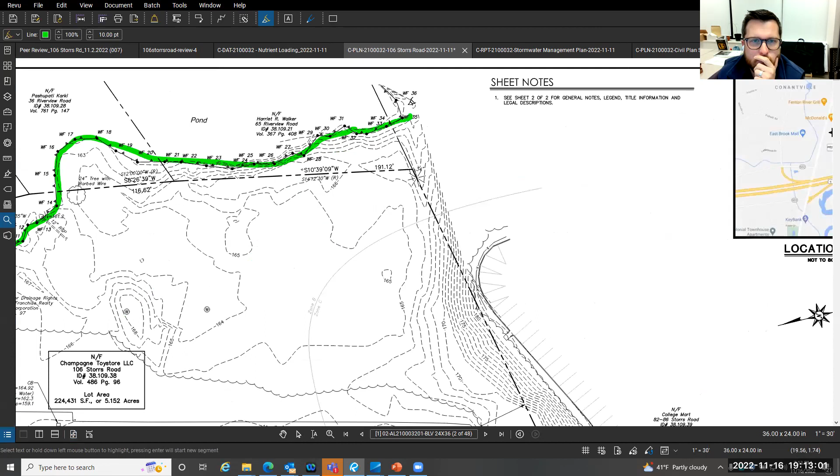So as you can see, obviously the majority in this area are all residential, and as they kind of come back towards McDonald's, they sneak into the corner of this property here. Move forward to our proposed plans. Sorry. All right, so proposed conditions here.

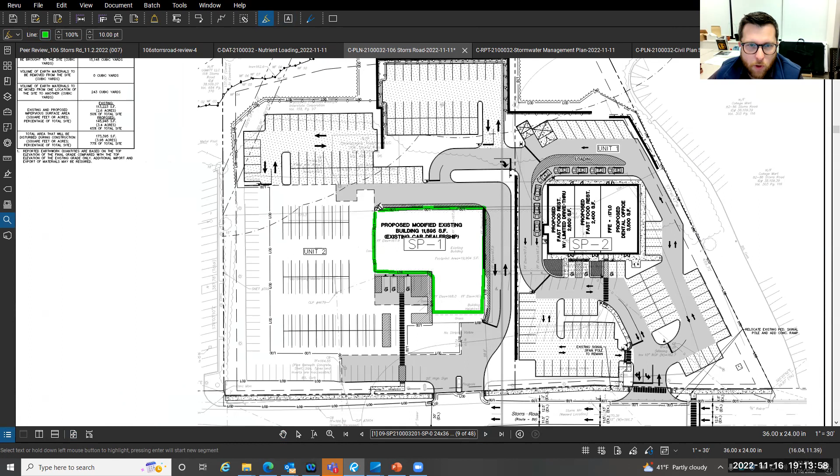So the goal is for Champagne Motors to remain on the property, but it'll be significantly reduced. So I'll just highlight it for you quickly here. The goal of Champagne Motors is to reduce the overall size of their building, but still maintain the services that they do provide now, obviously selling cars, and then obviously doing the necessary repairs. So as I said, it was about an 8,000 square foot reduction, leaving about 12,000 square feet on the property.

In addition to that, their driveway will remain the same along here. Storrs Road is still along the bottom of the page for orientation, with some parking reconfigured along the front and side, with expansion of parking towards the rear. On the right-hand side of the property, where the Champagne Motors is being demolished, I'll just show you roughly where that is in red here. This is the portion that's being demolished. We're looking to add a new mixed-use development that would have a mix of 3 different tenants, 2 restaurants, and 1 dental office, approximately 8,500 square feet.

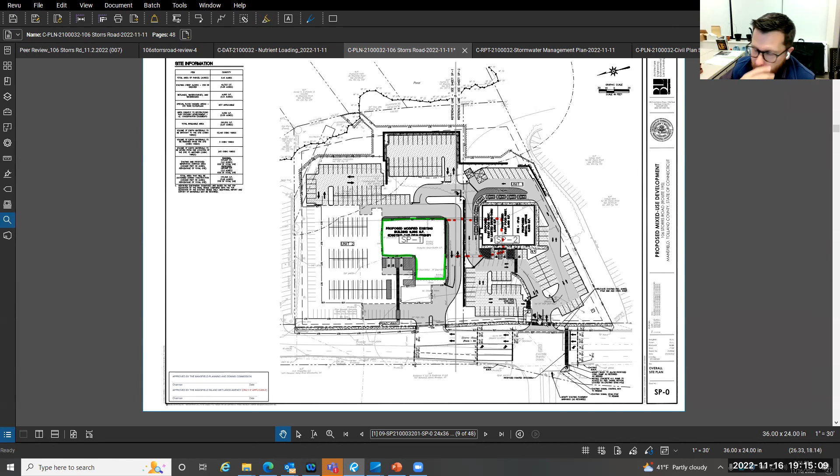This development would have a new driveway that lines up with the intersection to the Eastbrook Mall, currently a signalized intersection that has 3 legs, obviously left and right on this page for Storrs Road, and then 1 traffic signal facing the Eastbrook Mall. We would be looking to upgrade that signal to provide another head that faces our proposed development. So you can see roughly where my hand is here would be a secondary entrance to the property for this development, but there is interconnectivity between the properties as well. This will all remain under same ownership, just 2 different condo units.

Just to point out too, obviously Storrs Road is a DOT road. So a lot of these improvements in terms of striping, signalization, crosswalks, things of that nature do need to go to DOT for review and approval. Some site features that we're proposing, I'll just point out here. We're proposing sidewalk along the frontage of the property. There's currently none on this side, so this will hopefully be the first domino to fall to eventually the redevelopment of other parcels along this for the walkability of the site. We do show connections to both of the developments for connectivity to those sidewalks.

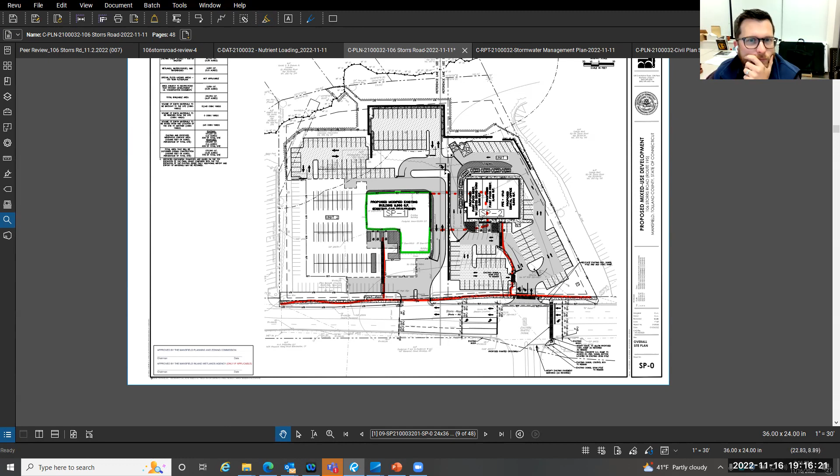In addition to that, we do show patios along the front of the mixed-use development for the guests for eating. We also show a bike rack as well for an alternative mode of transportation for visitors to the site. Well, one of the restaurants has a pickup window. It's not a drive-through; it's the pre-order pickup window. So we do show loading and queuing along the back of the building with the pickup window where my hand is hovering here. We also do show a loading area as well, and we do show some dumpster enclosure areas towards the rear of the building.

Jump forward to our grading and drainage.

Sorry, a little bit of a cold. My toddlers pay me back from going to daycare every day.

So the existing site has a very limited stormwater management system. It's really basically catch basins and piping that directly discharge to the wetlands, roughly in this vicinity here. So obviously we're looking to make some significant improvements as part of the redevelopment, using the town regulations as guidelines along with the Connecticut Stormwater Quality Manual and the 2002 Erosion and Sedimentation Control Manual. So I'll talk about these in two different phases. I'll talk about Champagne Motors, then I'll talk about the mixed-use side.

So Champagne Motors is obviously a retrofit. We're touching less of this property, but we still try to make improvements to how stormwater management is done on the property. So there's a lot of existing catch basins and piping that will remain, but we're adding additional catch basins with deep sumps and hoods. We're adding offline hydrodynamic separators, and we're adding a subsurface detention system and an infiltration system. So just roughly in general, all the water on this side of the property flows directly back to the wetland here.

So I'll just move forward to the erosion sediment. Utilities first. In general, as I'm sure you're aware, developed area, all utilities are available, either on site or on the street. So water, sanitary, gas, tel data are all available. So we'll be modifying obviously any connection to the existing Champagne Motors when that portion is demolished to sustain that building and be bringing in new utilities for the mixed use development.

Erosion and sedimentation control. Obviously, there's going to be some earthwork here, and the goal is to be able to protect the town road, the abutters, and more importantly, the wetland to the rear. So we have provided a variety of control measures on site that the contractor should be putting in place prior to starting of work, maintaining throughout the work of the project, and should be maintained until the site is fully stabilized and to the satisfaction of the town.

So a bunch of these things I'll just point out to you. We have a construction entrance, silt sacks, silt fences, soil stockpile areas, erosion control blankets, all these devices that will help and aid, and protect, as I said, roads, abutters, wetlands, while the site is being constructed, and should remain in place until everything is stabilized and operating properly. So there's no detrimental effect to the wetlands.

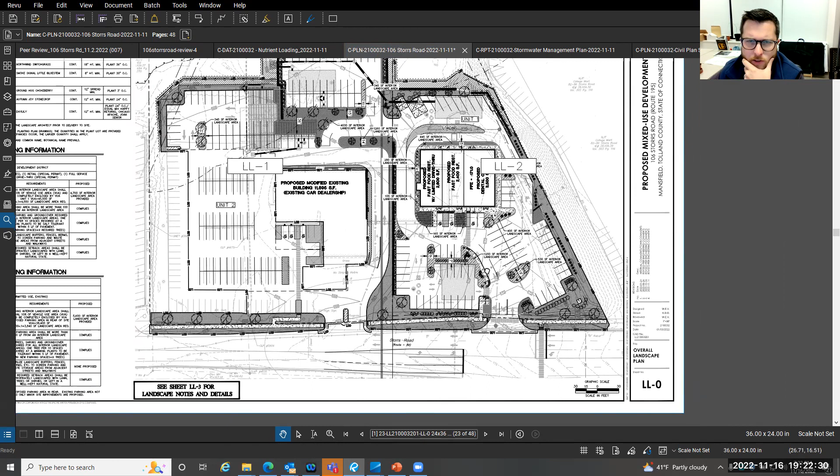Obviously, I pointed out the proposed sidewalk along the front of the site. We're pairing that with a variety of street trees and shrubs. On the right-hand side, we get into a lot of interior landscaped islands with trees, shrubs, and grasses. That continues around the perimeter of the parking as well, and along the redeveloped parking spaces behind Champagne Motors. I'll point out, in addition to that,

a wall as part of the development towards the rear here as well, to minimize the incursion into the upland review area. We're obviously trying to maintain the existing vegetation to the rear of the lot, and we are also adding a fence along the rear to complement the naturally existing buffer back there, from a safety standpoint and a buffering standpoint.

So, Mr. Chairman, that's a high-level overview of the plans. I'm happy to have Eric Davison speak to his investigation on the wetland delineation, and then we're happy to answer any questions you guys may have. So, Eric, are you there?

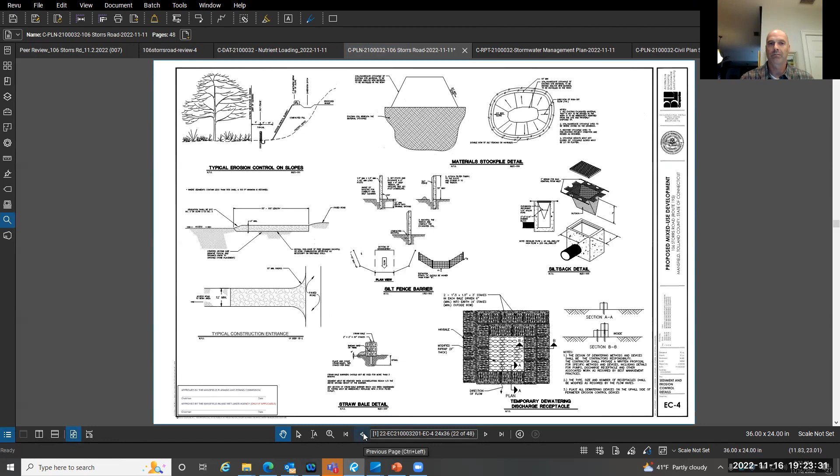Yeah, can everybody hear me okay? Yep. Hi, my name is Eric Davison. I'm a wetland scientist, soil scientist, and wildlife biologist, Davison Environmental.

Just a quick summary of what we've done on the site. We delineated the wetlands in March of 2021. We did some wetland evaluation in the fall, I think in November of 2021, to do a basic wetlands functions and values assessment.

And in that assessment, we identified the potential for some vernal pools in the bordering wetland east of the site. And so we sort of tabled that initial assessment and did a vernal pool assessment this past spring, and then did a subsequent report that tied delineation, the wetland functions and values assessment, and the vernal pool survey all together. So I'm assuming you have a copy of that report. It was dated August 29th of 2022.

As Matt said, there's just one wetland system on the east side of the site. Most of the wetland actually occurs off-site to the east and behind the subdivision that is on Riverview Road. It's one continuous wetland system. It does extend a little bit to the north and extends a significant distance to the south. To the north, just off-site, the wetland essentially ends. There's no feeder stream or wetland system. It's really just fed by runoff from surrounding development.

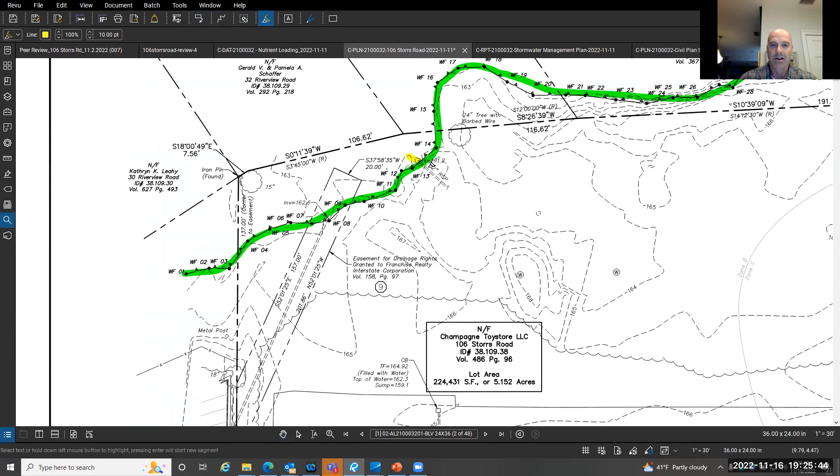The only area that's directly draining from the site with a surface discharge to the wetland is a pipe that outlets right around wetland flag 13. Maybe Matt can elaborate on the source, but I'm not certain we ever determined the exact source of that pipe. But based on what's at the outlet, which is a significant amount of sediment and trash, it's likely that source is road runoff.

The wetland bordering the southeast portion of the site, there's a large offsite pond. It's a human-made pond, based on the fact that it's a fairly perfect circle, and it has an earthen berm on the southern end. So it was clearly created, probably historically, for some type of farm use, for livestock or for crops or something. But it's basically a small circular pond. As I said, it has an earthen berm on the southern end.

That earthen berm has been breached, and so the pond is basically in a flow-through condition. It has about a foot or two of standing water, depending on the season and whether there was a recent storm event. And at the northern end of the pond, there's a pretty significant sediment delta that appears to be sourced from that road runoff. It appears to be road sand type material that's formed a sediment delta in the northern end of the pond. And you can see that in the photographs that I included in my report.

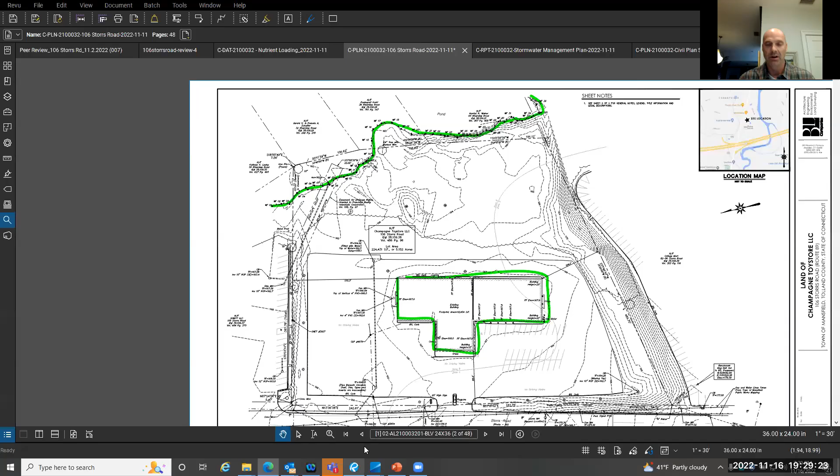The only thing breeding in the pond were green frog, which is a common amphibian that occurs statewide and most typically in disturbed habitats that are permanently flooded. It has a multi-year larval life cycle, so it requires permanent flooding. In the initial parts of the survey, we went out and did chorusing surveys. In other words, we listened for chorusing frogs when we knew that the wood frogs would be actively conducting breeding choruses just based on what we were seeing at other pools we were surveying statewide.

So we went and surveyed the pond, heard no chorusing, but I did hear chorusing off in the distance in that southeast system where I had mentioned there looked like old relic oxbow features. So I traced that chorusing down, found one adult in an area that was not suitable breeding habitat, but it led me to believe that if there's one, there's more.

So on the subsequent visit, we searched and found a vernal pool in that wetland system that's basically south of Riverview Drive, or Riverview Road, and north of Route 6. And that vernal pool, I GPS located with a Trimble GPS unit and put that data onto a GIS-based map, which is included in my report, so you can see where that pool is in relation to the property boundary and the site. It's approximately 600 feet away from the site boundary or the edge of the site activity. So it's a pretty significant distance.

That vernal pool just had one indicator species, wood frog. I didn't find any salamanders of any kind in the vernal pool or in the on-site pond. So the only indicator species in this whole system that I could find were wood frog, which is what you tend to find in these more stressed systems where the landscape is a bit more developed. The Ambystoma salamanders tend to disappear before the wood frogs do.

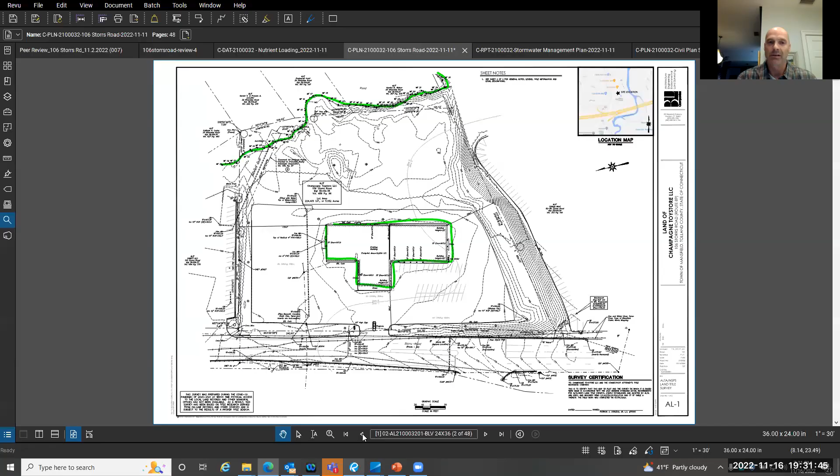In terms of the upland review area, or the wetland buffer, that lies between the existing building and parking and the wetland, most of that is disturbed. Historically, it is all forested now, mostly with young trees. But when you walk that back wooded area along the edge of the wetland, you can see old fill piles, old cut slopes, old berms.

So basically at some point that whole wetland boundary was manipulated and disturbed, but it is all revegetated now and mostly forested, mostly with mixed hardwoods, a few pines, mostly just typical mixed hardwood species, and a lot of invasive shrubs like burning bush and things. So that's a pretty decent overview of the wetland conditions.

Again, my report talks about functions and values and some of the other things. I'm assuming maybe you have some questions. I don't know if there's anything else you want me to go into in detail. Thanks, Mr. Chairman, Eric. I think just in general, that's our overview. So happy to answer questions. I'm sure you have many.

Thank you, Matt. Thank you, Eric. Commissioners, anybody have questions for these presenters? Yeah, John. I have a few questions here. I'm trying to understand on the south end of the property, how much fill is going to be put in there? How much is this going to be raised above its current area?

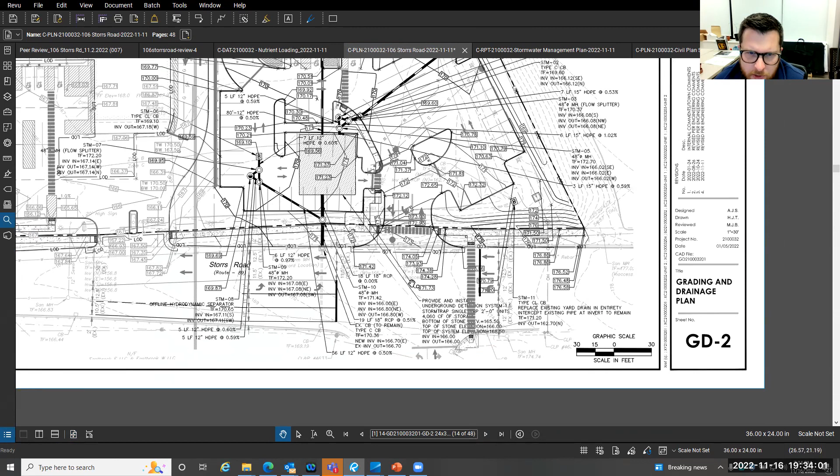So roughly in the middle is around 173, and we'll be coming down into the property for a finished floor elevation of 171. If you can see below here, I'll highlight the two numbers for you: 171. The existing finished floor elevation of this end of the car dealership is 167.9. We'll call it 168. So there's around 3 feet of elevation change between the existing finished floor building here and the proposed mixed-use building.

And to the south, that's a slope up to the next development. Is that right? Correct. You're talking about over here where my hand's floating? Yes. Yep. That is a slope up to the Staples Plaza. I'll just show you because this is that slope here. The property line obviously falls towards the bottom of that slope from this view.

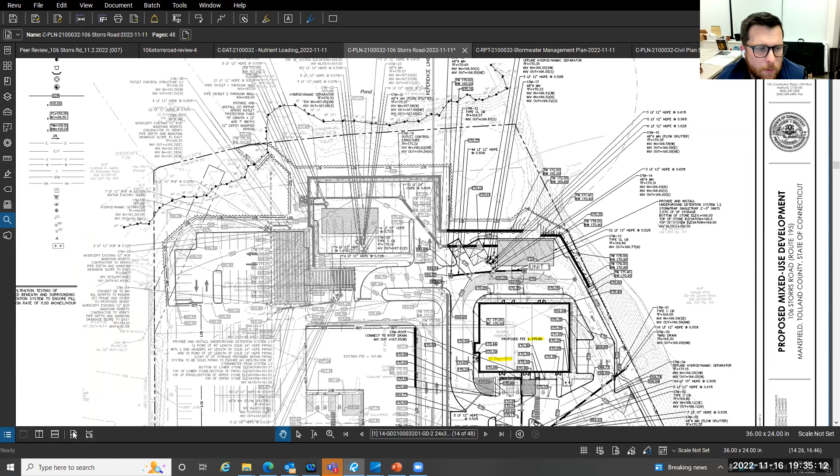And there is some steep contouring in the rear, the east end. Is that right? So that's going to increase the contours at the back end. No. So let me just show you. I'm going to just bring you back to the existing conditions survey just to show you.

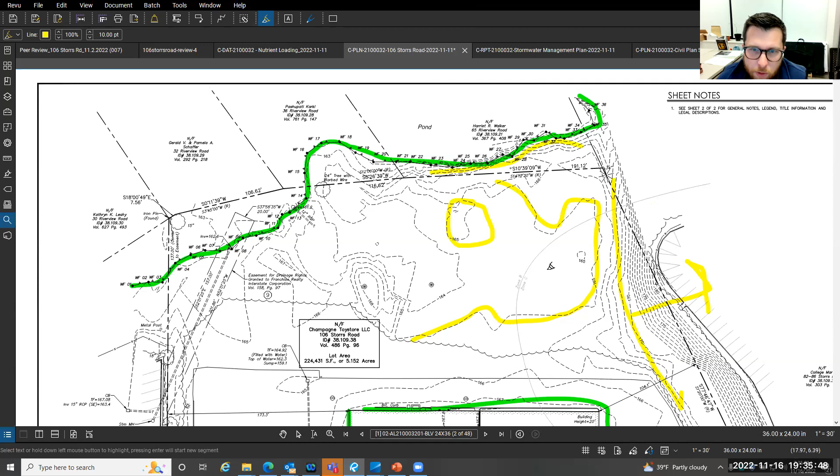So you can see, obviously, there's quite some tight topography moving this way to the south, but this is relatively flat back here, right? So 164, maybe a high spot of 165. There is, as Eric mentioned, a little berm off the property adjacent to the wetland in this area, but in general, 1 to 2, 3 feet of elevation change existing currently.

If I go back to the proposed site or grading plan, one second, don't want to give anybody a seizure here. We are proposing a retaining wall as part of the back of the development. I'll just quickly highlight it here. So the goal of this is, as part of the peer reviewer's recommendation, to limit disturbance into the upland review area. So we're looking to maintain the vegetation and the topography in the rear here, and we're using a retaining wall to make sure we don't encroach too far with slopes. In general, that retaining wall height varies, from a few feet maybe up to 7 or 8 feet in some of the higher spots in the corner here.

Matt, just to clarify, does that mean there's 7 to 8 feet of fill in that area where the retaining wall is that high? So let me get you more specific here. All right, so highlight the wall again on the Champagne side. So in this area here, you can see bottom of wall 164 to 173. So we're roughly about 8 feet in that area there, tapering back down to nothing. In this corner over here, we're looking about 5 feet.

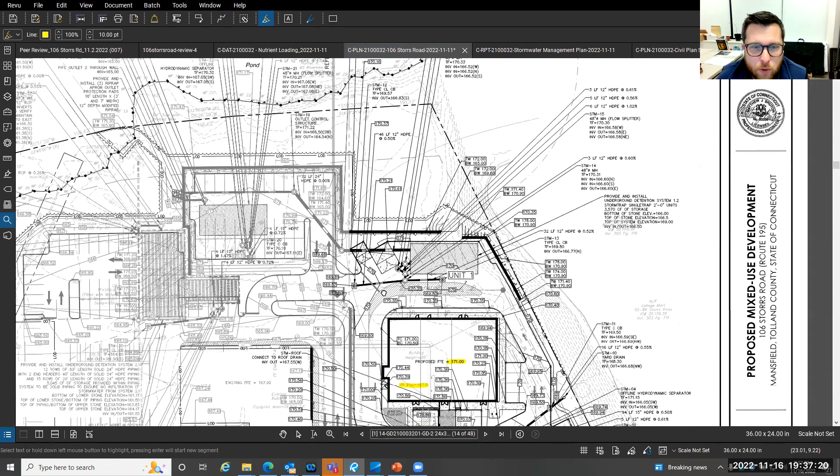If I jump over to this side, area here, like I said, 5 feet on this side. As you come towards the end here, looking around 7 feet, and then as we abut up to the Staples Plaza with that slope, we're on the lower side here. Obviously, the high side is Staples. We're around 8 feet here, but tapering down to 1. So around 8 feet is the highest it ever gets.

Okay. Another question sort of following up on this. There's a substantial increase in the paved surface here. I presume this is impervious surface. You're not looking at semi-pervious surface, but is there any way to reduce that sort of bump out parking lot in there? And I'm looking at this very contorted road system that's in there. There must be a more efficient way of doing this without encroaching on the back end and the wetlands. Based on what the wetland scientist said, this seems to be remnants of a natural riverine system with some oxbows. It would be nice to be able to preserve this to the extent possible.

And certainly this is a vast increase in the amount of parking relative to what is currently a car dealership with lots of parking on it already. So I don't know whether there's a way of reducing that or reconfiguring the contorted road network on the property as far as the proposed plan is concerned.

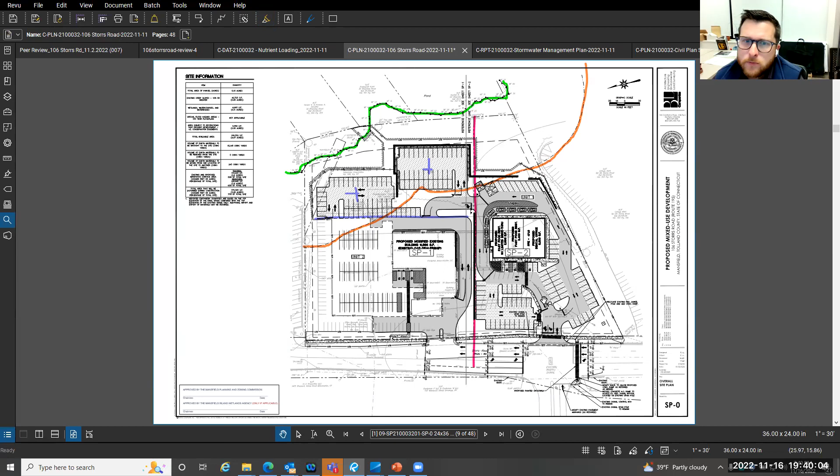Oh, sorry, go ahead. What about getting rid of that road behind, and there's an open space just below the red line there? You're talking about this road here? Yes. And then moving the parking lot further. Yep, understand. So the goal of maintaining this roadway here where my hand is floating is to provide interconnectivity between the two properties. The goal is driven from a safety and functionality standpoint between the two businesses, but also from a traffic standpoint as well. Not having people leave a property, go down the street 100 yards, and then come back into the property. So from a functionality standpoint, we believe that a driveway connection between the two sides of the lot is critical to the operations and safety of the site.

So I'll continue this purple line here to your questioning. That is roughly the existing extent of the existing pavement behind the building. So this purple line, anything behind this is an additional impervious area. Obviously a portion of that, as you can see from the orange line, is in the

upland review area. We did come in, as Eric mentioned, with a different plan prior to the vernal pool study. We had submitted that to the town. I don't think we got as far as this commission, but I do have it here. It was a lot bigger development. We had 4 tenants, 2 drive-throughs, more parking, more dumpster locations, and honestly, we were staying out of the wetland,

but we were basically clearing almost the entire lot. Based on feedback from the town, some of the site walks, and consultation with Eric and then peer reviewers, the revised application in front of you has been dialed back significantly to provide the needs of the business, but also hopefully respect the wetland resource to the rear of the property.

I have a few other questions, so maybe I'll let other commission members chime in if they have any. Go ahead, Chad, and then Aaron. Okay, I was going to stay on this figure here. And I have a similar question as what John raised about this expanded parking. And I understand trying to maintain functionality and use of the 2 buildings while providing, sorry, I have a cold, as well, connectivity between them.

But who's envisioned to be parking in those lots? Will it be the folks that are using the mixed use buildings, or will it be Champagne Motors folks? And I'm asking the question because it's a substantial increase in impervious surface proximate to the wetlands, and the parking is almost entirely within the upland review area. And I'm not seeing walkways that connect those parking lots to the mixed use development. So I'm wondering what the intended purpose is.

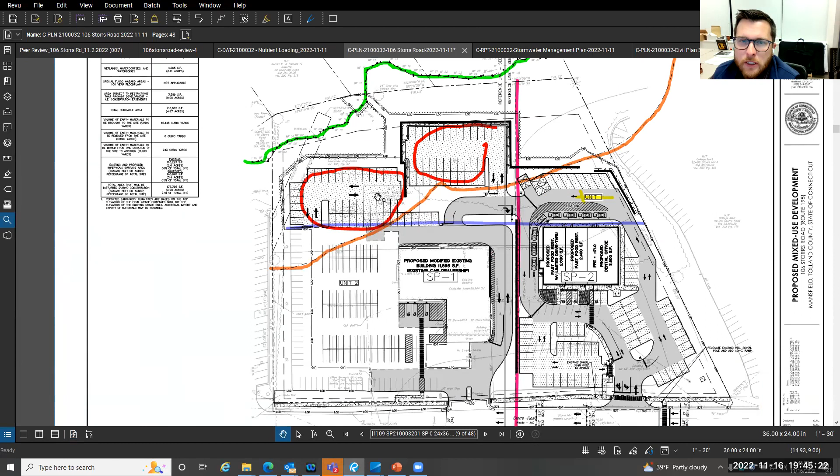So it'd be standard. All the spaces that are shown on these are standard. I think that 9.5 by 19 is your regulations in terms of parking space size. And you can obviously see here as well, zoomed in, that we have double stacked cars as well. So it's not really functional or necessary for the mixed use development. So they will just be cars to be sold. Thank you. I have a question.

Wait, let's just, Chad, do you have more questions? Okay, questions related to this. Yeah, let's go to Aaron, and then we'll get to Meg, and then we'll get back to John.

My question had to do with, so you have a retaining wall that starts at that kind of middle parking lot. So I'm wondering about the parking lot to the north, if you have a vegetative buffer plan there, or if you're going to do plantings between that parking lot and the wetlands.

Sorry, I just want to make sure I heard your question correctly. There was a little bit of echo. Are you talking about the vegetation along this area where my mouse is moving right now? That I might have missed. What's planned for that area? Sorry. Here, let me move to the landscape plan, and then you can steer me in a different direction if you think I misunderstood your question.

Okay, so let's just get some highlights out here. So the retaining wall along the eastern side is in this direction here. On the northern side, change colors, the existing edge of pavement is roughly in red. And if I change over to green, obviously this is the expansion of the parking lot on the northern side.

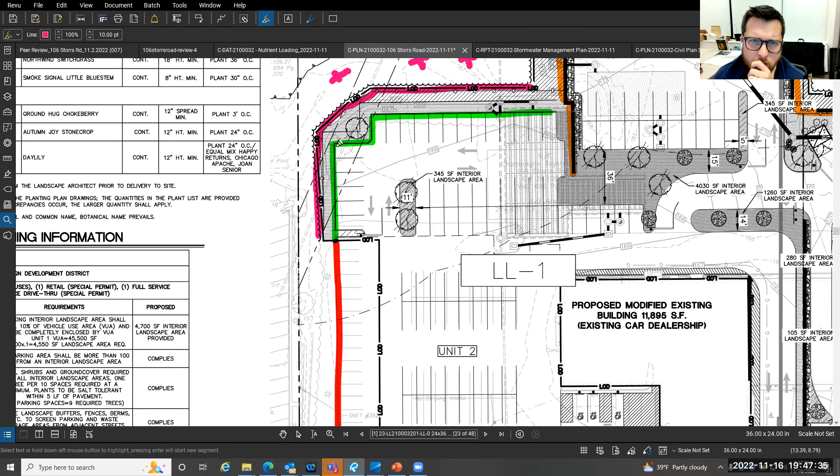We're showing, again, a limit of disturbance marked as LOD here that I've highlighted in pink. So anything beyond this, kind of in this area where I'm putting those plus marks, is existing forested area. So in this area, beyond our curb line between the LOD, we are showing a fence, and we are showing grasses and trees along the perimeter of the parking. That obviously continues as we go south and to the east as well.

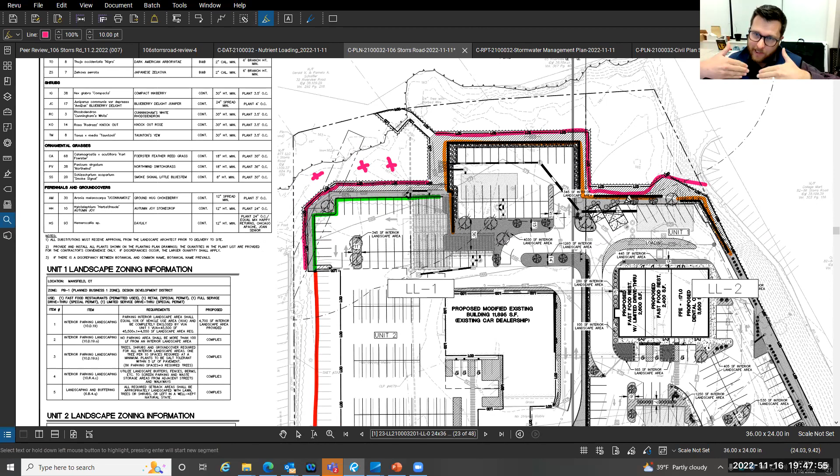The LOD obviously is around here as well. And we do show plantings on the high side of the wall, and then vegetation obviously on the low side of the wall. Does that answer your question? Yeah, how wide is that? From the edge of the parking lot to the pink line? I think she means how wide is it between the retaining wall and your tree line? Yep. One second, I can give you that exact number.

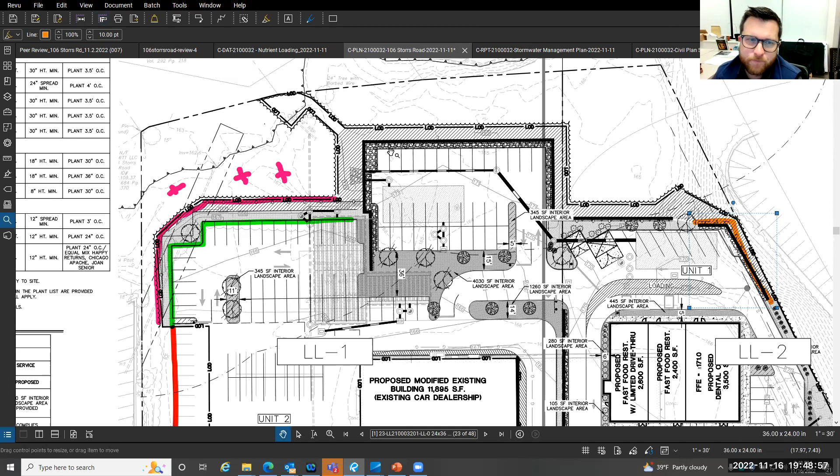Approximately 10 feet. Obviously, we wanted to keep it as tight as possible. There's obviously a little bit of disturbance on the downside of the wall just for the constructability of the wall. Matt, is that a sloped area, that 10 feet, or is it relatively flat? It's relatively flat. If I just go back to the grading plan, I can show you that specifically. That's okay. I just wanted to get a sense of if there was a steep slope or not.

Yeah, so just to give you in general, I showed you before that kind of high spot of 168. We're proposing to continue a high spot. So relatively flat at the base of the wall, which blends in with the topography between the wall and obviously the edge of the wetland. Thanks. Aaron, did you have more questions or comments? No. Meg.

Yeah, I wanted to pick up on the comment. You can go back to the parking, the labyrinthine parking. Is this more, less, or the same amount of parking for the Champagne Motors part than they have now? Because they're demolishing their body shop, right? So they're getting rid of some of their operations. So how does the proposed parking compare to what's present now?

Hold on one second, Meg. I gotta get that number for you. I will say that while I'm figuring out that number, they are reducing the size of the building, but still keeping the amount of services that they do have. So they still are selling cars and doing body work. They're just doing it in a smaller space. But give me a second, I can find out roughly the number of parking spaces before and after. Well, there's more area than spaces, really.

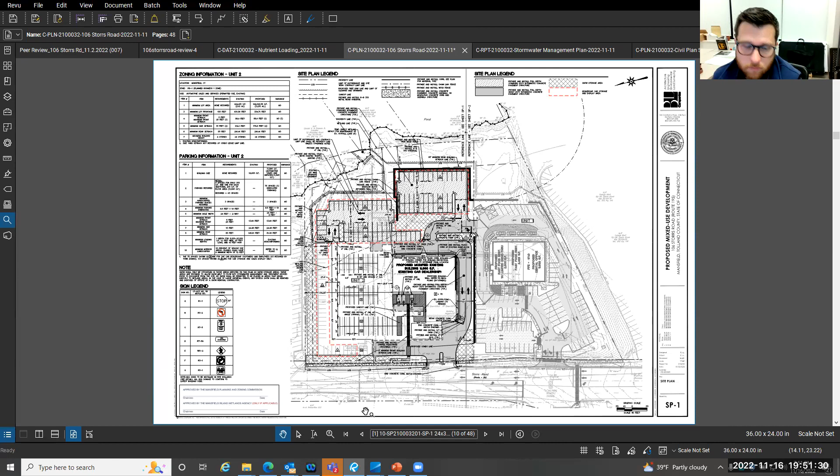Okay, so the connecting drive that sort of pushes the easternmost parking lot out close to the upland review area. I'm not sure that I really understand the need for connectivity. Is there some need or desire on the part of the owners of both proposed developments to connect from one to the other? Is there really a functional need for that? Because it does push that parking lot out quite a bit.

Yep, I understand your question. So, yeah, it is a real functional need, right? So just picture this. Obviously, employees from Champagne Motors, salesmen, mechanics, the owner, and then people coming to visit to get their cars repaired, or they're shopping for a new car. And then next door now they have a new amenity, right? There's restaurants.

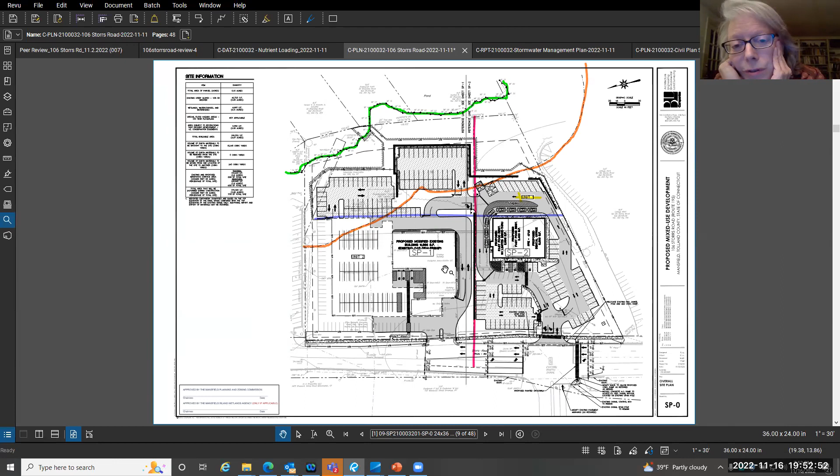So I can easily imagine employees and customers coming to Champagne, crossing over to the other side of the parcel to get lunch, get dinner, kind of be patrons of this whole area, as opposed to just coming to one portion of the site. So there is a kind of a practical need for the interconnectivity between the two businesses on the same property. Well, as Chad pointed out, there isn't even a walkway connecting for just walking over from one building to the other suite of buildings.

Yeah, so there's no interconnecting connection from a pedestrian standpoint on site, but we are showing, as I said at the beginning, on the road side, obviously a frontage sidewalk along the entire thing and connectivity to both front doors as well. Just to remind everybody, we are raising the grade on this side to make the driveway connection to the existing traffic signal. So there is a retaining wall here in yellow between the two sites. So the pedestrian connectivity between the two sides of the lot will happen along the frontage or through the driveway to the rear.

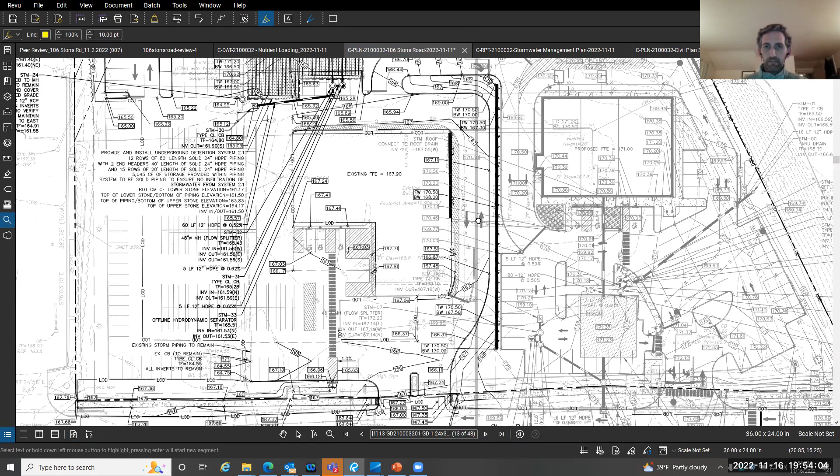What's your elevation change at the west end of that retaining wall, Matt? I'm just curious, because I was thinking earlier, there could be a reasonable alternative where you have a pedestrian and vehicle connection at the west end of that retaining wall, in the front of the buildings, instead of in the back. Yep. So the retaining wall, highlighted here in yellow. We're somewhere around 3 feet here. Yeah, it's about a 3 foot wall between the two driveways.

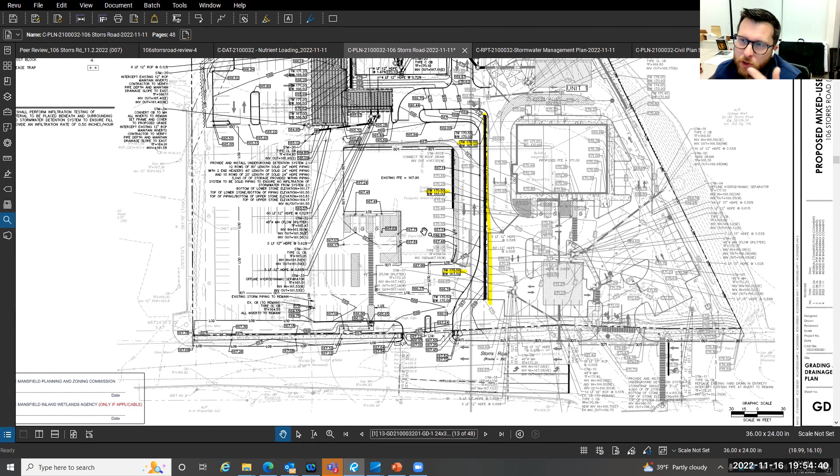Okay. So nothing significant, but just making up grade while preserving some of the circulation around both the buildings. Obviously that's a needed desire from the emergency services, police and fire, to be able to circulate around both buildings. Sure. We have familiarity reviewing plans, but not designing things like this. But I agree with Meg and John and Chad. What we see is some additional space to the west of that parking lot, where the parking lot could come closer to the dealership, and then potentially a connection could be made in the front of the buildings for pedestrians and for vehicles. Reconciling that elevation would be a challenge potentially, but it would certainly reduce the potential for impacts in the back.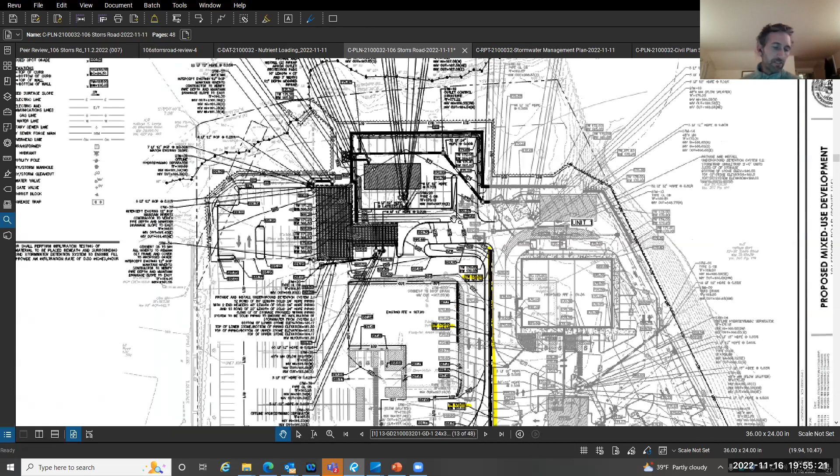Right, and another aspect of this driveway connection is the grade change between the Champagne Motors portion of the site and the mixed use; we're making up that change as well. You can see we're climbing from 166 to around 170. So the length of that driveway is also a factor of climbing the grade between the two sides of the property. But I understand the vision here is that staff and customers of Champagne Motors would hop in their cars and drive over to the mixed use site? They could, that's the option with this driveway connection. But they also have the pedestrian sidewalk connections, which currently don't exist on site or along the frontage. Right, but you defined that driveway in the back to be a need. A need. Not a want, so a need.

What is the feasibility of putting the interconnecting driveway, if you feel that it's a need, toward Storrs Road instead? Thereby letting the proposed parking lot on the easternmost side move closer to the building and away from the wetland. So placing the driveway, say, here, as opposed to an interconnection towards the rear, has more safety concerns. We're very close to a busy road with driveway entrances on either side, and a lot more movement with pedestrians on crosswalks and parking spaces. The goal is to provide functionality between the two sites, but also a safe way to traverse between both sides of the property. So we feel it was the best location to have it.

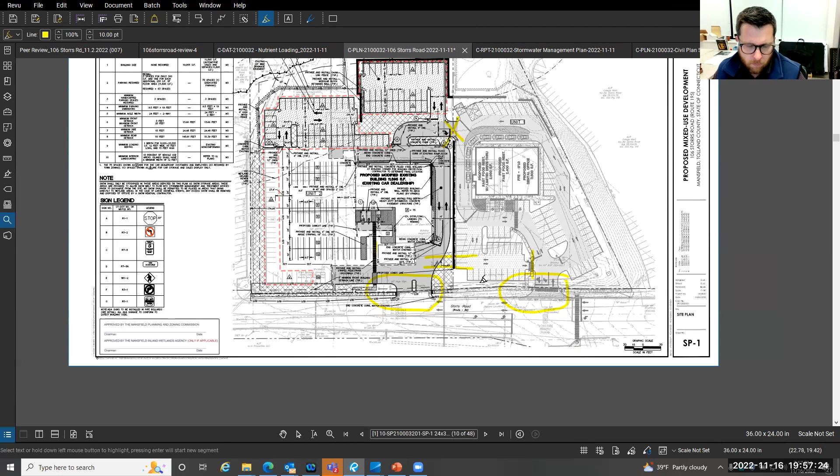Well, I would just say that it's something I would like to see explored to avoid such proximity to the wetlands. Particularly since you've got a lot of pavement for the newer development by the roadside. And that's kind of a walk, from the park across a lot of parking lot, to reach the 2 restaurants and the dental office.

I think we've made a pretty good, thorough argument for ourselves. So I know there's more comments. So John, did you have something else? And then if anybody else, just chime in after John, please.

I have some additional comments. I was just going to also comment that the one in the back, you can see the double parking area in the back, the double lots, that's primarily for storage. So it seems to me, if you look at the current storage, everything is flat; there's no sort of parking lots bracketed on top of each other or back behind, sort of in a checkerboard fashion. It's sort of continuous now. So if this is just going to be storage, it seems to me that the kind of argument that we're making here can be realized. But I don't want to beat this anymore.

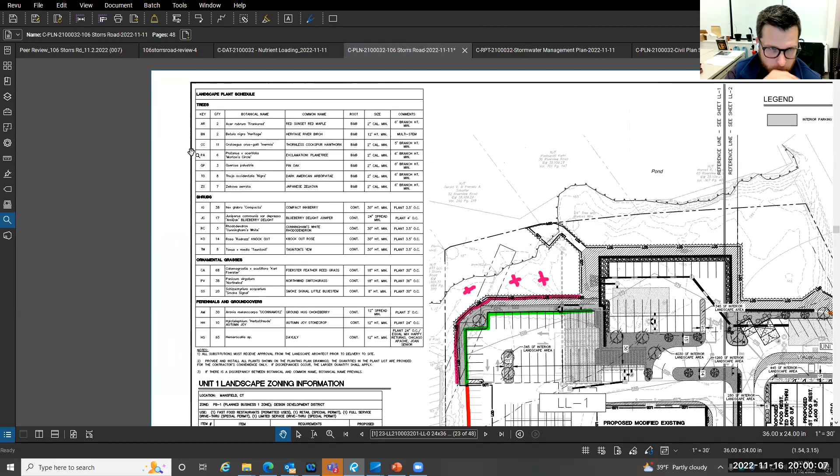Sure, great question, John. So our goal is obviously not to introduce any invasive species to the property. That's not something we're looking to do. We do show on sheet LL0 here the botanical and common names of all the trees and shrubs and grasses here as well, perennials and ground cover. And we'll be certain to double check with the peer reviewers and town staff that we haven't inadvertently put something here that's invasive, but that is definitely not our goal. And if we find something that is suspect, we would certainly remove it and replace it with something appropriate on the plan.

I'm sorry, I missed that. There were so many different pages here to look through. I missed that one. No problem, no problem.

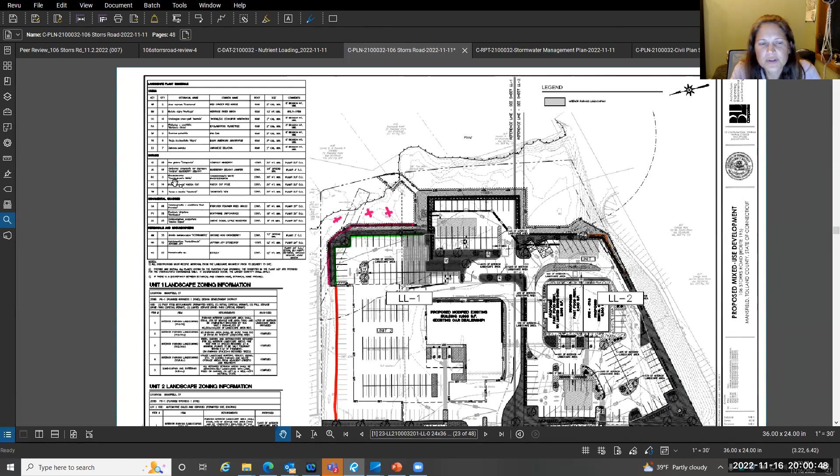I just had a follow-up for that real quick. So there are a couple species, there's a Japanese something or other and a yew, and there are better alternatives than some of the species on here, so I don't know if that's something that we can recommend. Yeah, Aaron, I would say any species that you recognize that could be a concern, identify them now, and we can add them to our minutes. Well, Zelkova is an alien species, but I don't believe it's invasive. But again, we should try to focus on mainly native species.

Again, if you guys have any suggestions of trees or shrubs or anything that you'd like to see here in lieu of what we have on the plan, we're happy to make those swaps as appropriate. I'm not the landscape architect, so probably not the best person to speak to it, but happy to take your suggestions and make some revisions to the plan.

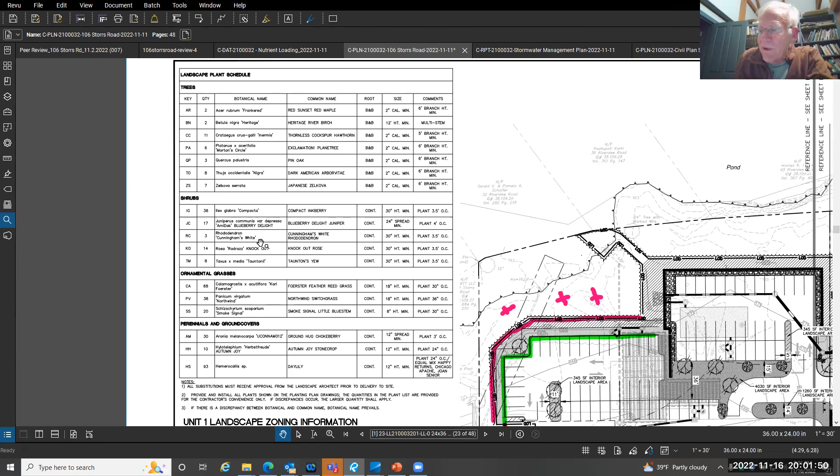Okay, another question I had was lighting on this. There's, I guess, going to be quite a bit of lighting on this. I wanted to know if you're using dark skies compliant lighting. Yep, great question, John. So we do have a photometric plan. I didn't get to it as part of the set; obviously, it's quite large. Yes, we are providing upgraded site lighting for safety and security of the lot. It will be full cutoff, dark sky compliant fixtures that also comply with zoning regulations in terms of light spillage off the property. So yes, that is part of our plan set here. The LED fixtures on poles, and then also mounted to the buildings as well.

And I wanted to know whether you had considered any greenscaping in the site design here. I gather that these are going to be just asphalt paved lots as opposed to maybe semi-permeable. I didn't know whether there were any other greenscaping plans associated with this.

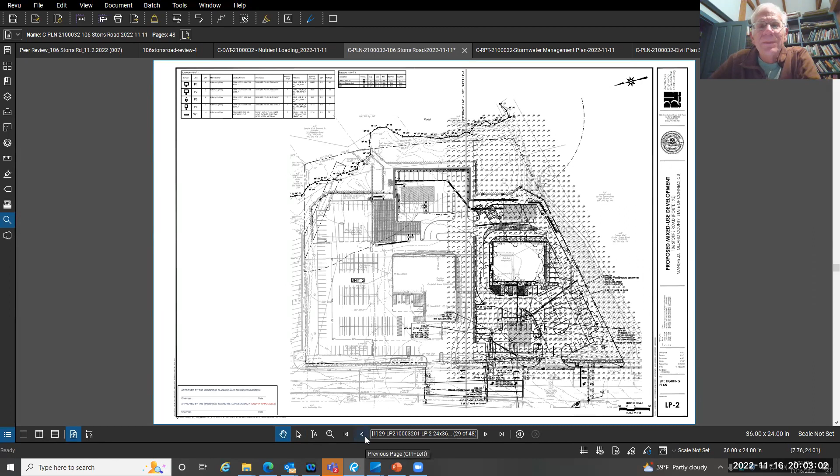No, I mean, we did do some investigation and conversations with the peer review engineer and peer review wetland scientist on alternative ways to treat the stormwater. And we ended up with the plan we have now with some of their suggestions based on existing site conditions. There's not a lot of space to do some of those larger natural LID type stormwater features, so that would involve going back into this upland review area. And we obviously wanted to maintain that natural buffer and minimize any disturbance in that area. So we kind of backed away from that to a certain degree to the current plan we have

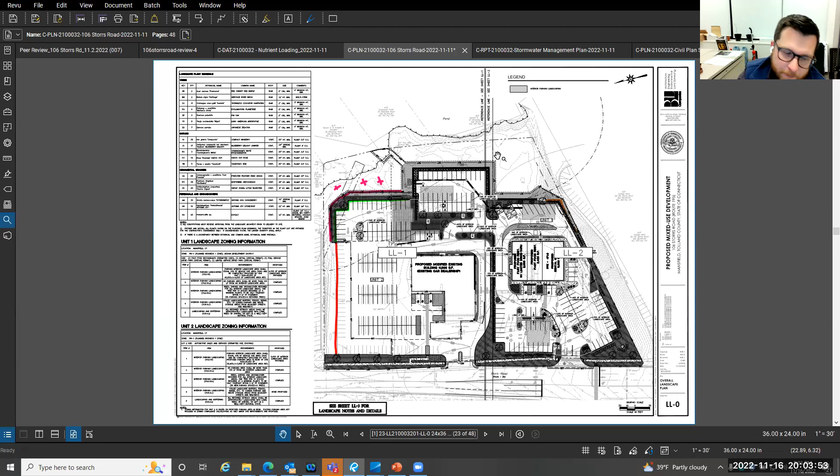with our stormwater management system. Could you just quickly, in a nutshell, describe the stormwater management practices at the site? Absolutely. So let me just go back to show you what there is now. Let me just go to the survey. So right now, I'll change the color so you can see this. And I'll just try to move slowly around with them.

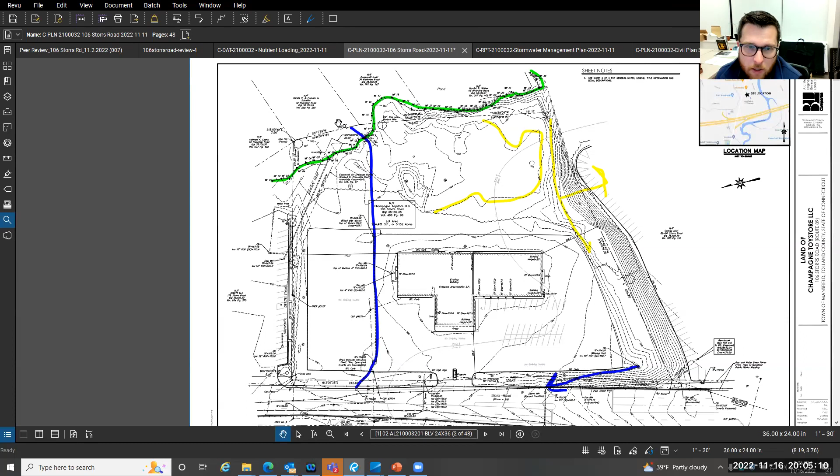There's a bunch of catch basins within the existing paved area now. So there's one here, there's one in the back lot here, and there's also one in the grassed area here, which goes to the street. So basically, in the existing conditions, there's a couple of catch basins, and in the front here a small area gets piped to the road, but the majority of the lot either sheet flows into the grass and into the wetlands, or is captured in the catch basins and is discharged to the wetlands. So a very basic system here. No treatment, no detention, no real stormwater quality features to speak of.

I'll move forward to our proposed plans. That's all of the existing, Matt? Just that one line? Yeah. Okay. It's very, very basic. So let me go into a little more detail on the Champagne side first. So obviously that line coming through here will remain, but we are upgrading it. We are adding an offline hydrodynamic separator to that line to provide the water quality treatment that's currently lacking.

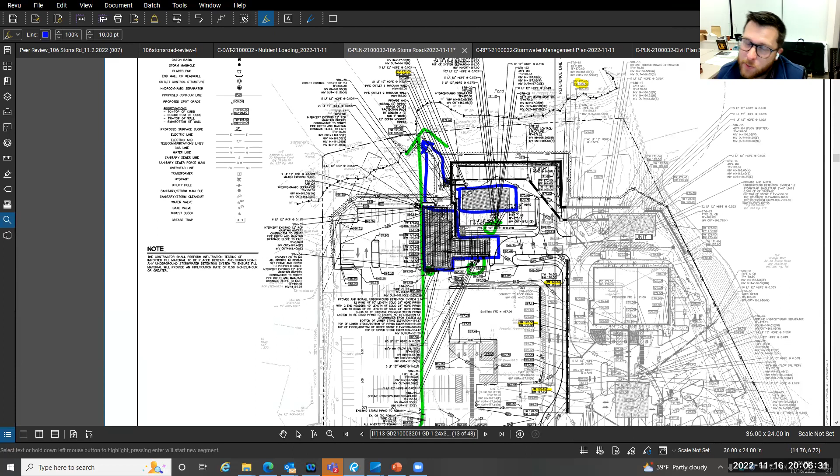And then in terms of the expansion of the parking lot and improvements associated with it, we're adding additional catch basins here that will have deep sumps and hoods that will direct the water to offline hydrodynamic separators that will then go into underground detention and infiltration systems. That's depicted by this box here and this box here. That obviously helps with water quality, but also peak flow mitigation. And then they will be discharged into the same area to maintain those drainage patterns to keep feeding the wetlands. Those are subsurface infiltration and detention systems, so they are going to infiltrate and retain until they overtop and discharge out to the wetland.

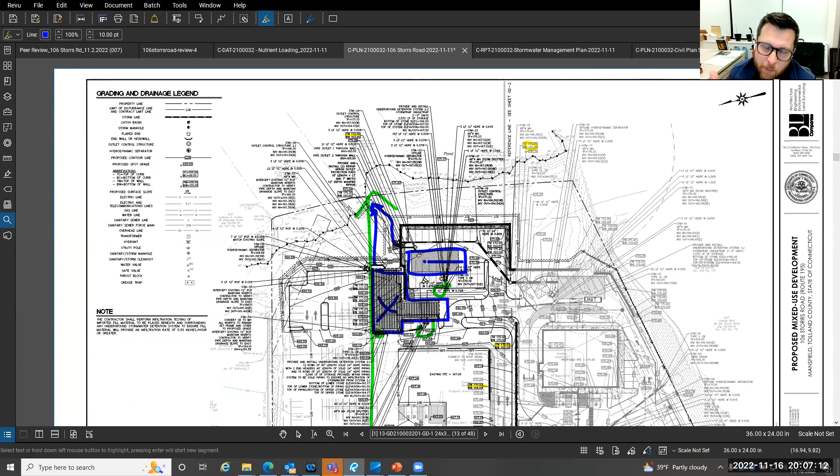The system here with the X on it is a detention system, and this one here with the line is an infiltration system. We evaluated it for the storms we mentioned, the 1, 2, 10, 25, and 100-year, to mitigate existing versus proposed conditions to deal with that increase in impervious area, along with the treatment train providing water quality improvement before discharging to the wetlands. So for the Champagne side, it's a big improvement because there's really nothing there now. Things just flow into catch basins and right out into the wetlands.

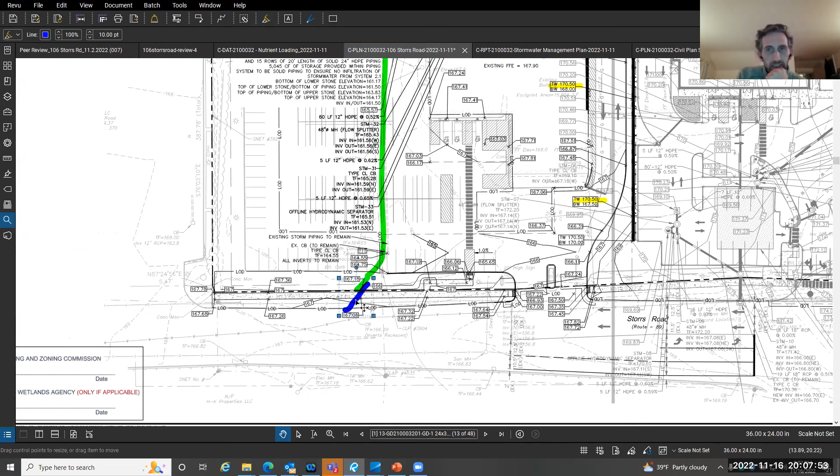Matt, sorry, could you go back, where does that green line begin? Does it begin from Storrs Road? Yeah, there's a catch basin in Storrs Road, blue here. So is that outfall taking everything the state is collecting on Storrs Road also? There's a little bit coming from Storrs Road, not the entire thing. There's also catch basins and swales on the other side of Storrs Road. I'm not sure exactly how the connectivity to Sawmill Brook is, but there are 1 or 2 catch basins on our side of the road. That one in particular does come to this line that cuts through our property to the wetland. Okay, so the analysis included that whole drainage area and not just the site drainage.

Right. And interestingly, if I go over to the mixed use side, there was the existing catch basin, highlighted in red here, that was in the grass, which goes to the street. So we're actually giving a little bit of water back to the road. In this case, we again have catch basins with deep sumps and hoods throughout the parking lot.

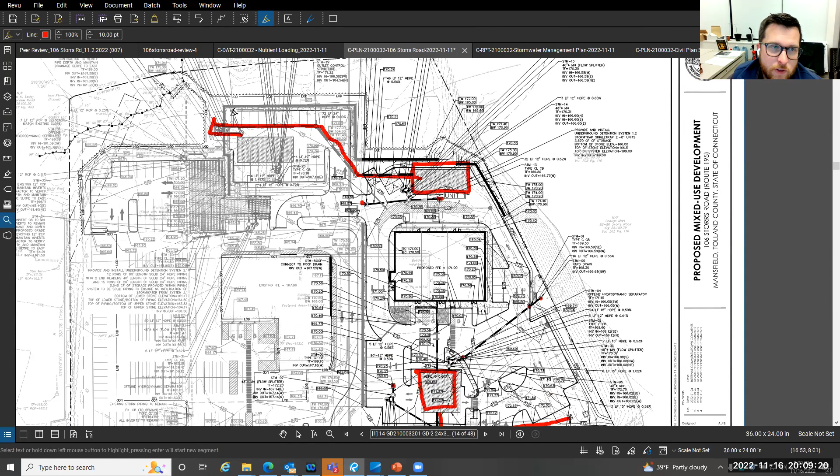Also, some yard drains here as well that go to offline hydrodynamic separators, a subsurface infiltration system which discharges to Storrs Road. And then similarly in the back, again, catch basins with deep sumps and hoods, offline hydrodynamic separators, infiltration system as well with interconnectivity to then match the existing outlet area to the wetland to the rear.

So it's all going to that one outfall in the east area. Correct. Yeah, that's currently where the existing site discharges, and we wanted to maintain that discharge point. As I mentioned before, there is a berm that's kind of off the property here between our property line and the wetland. So water really does flow in this direction.

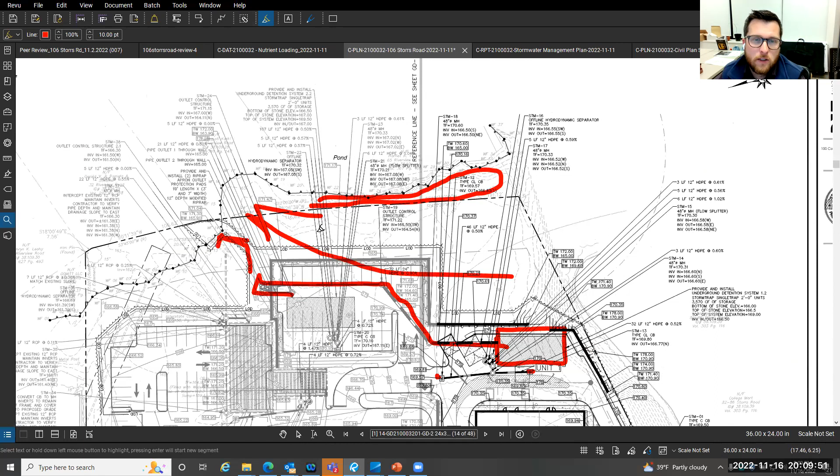This is a question, I'm just curious, for Jennifer or our peer review folks or for you, Matt. Are there restrictions or issues with tying into the state system? We review a lot of these developments, and we never see the developer sending stormwater into the existing stormwater system that's on the road, which would prevent an outfall in an adjacent wetland that's 30 feet away or something like that. Are there laws or regulations against interconnecting like that?

Yeah, so we do have to as part of this project because we're making some modification. We're adding a new driveway and obviously proposing to modify the signal there. We do need to submit an encroachment permit to the DOT. As part of an encroachment permit review, they're looking at traffic studies, they're looking at site plans, and they're also looking at drainage. So they are looking at what water we would send to them.

So we are allowed to send water to them, but we're only allowed to send water that's, to keep it crude, going there already. We can't go, hey, you guys don't want it to go to the wetland, we'd like to send everything to you. That's not going to fly.

So the stormwater management report and calculations that we provided to the town are also going to the DOT. They're going to verify that what we're sending to them is appropriate, isn't going to be a detriment to their systems, and they'll ask for revisions or more information for them to determine that's an appropriate connection. So there is one now. We're looking to maintain that, obviously, from a hydraulic standpoint to maintain drainage patterns. All right, thanks. I was just curious about that.

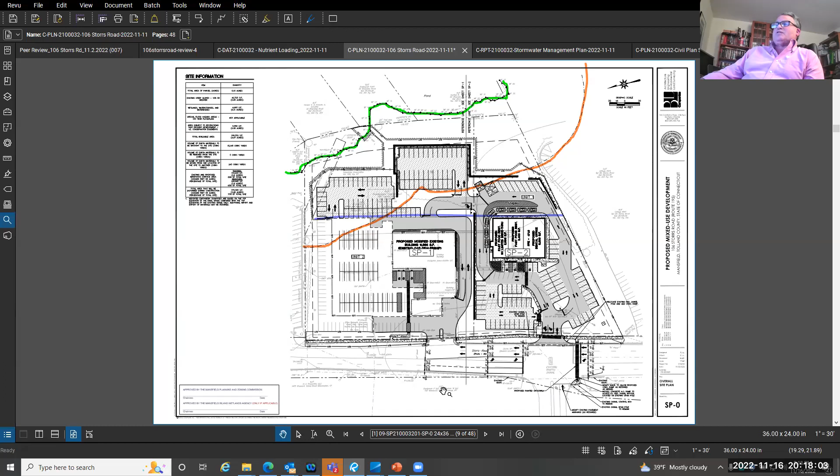One is they did provide, I asked for, the water surface elevations versus the weir height in the diversion manholes. And Matt, could you just pull up your grading plan where they show your manholes for the separators and just zoom into that area? Yeah, that one, without the colors, that would be better, actually. You want this one here? Yeah, that would be fine.

So, when the water is coming from the existing pipe that goes through the site, there's a manhole to divert the water quality flow, which is a rate of runoff based on the water quality volume. And I asked to make sure that the height of the weir within the manhole was set at the water surface elevation for the flow rate that was going to go to the separator. And Matt provided that information.

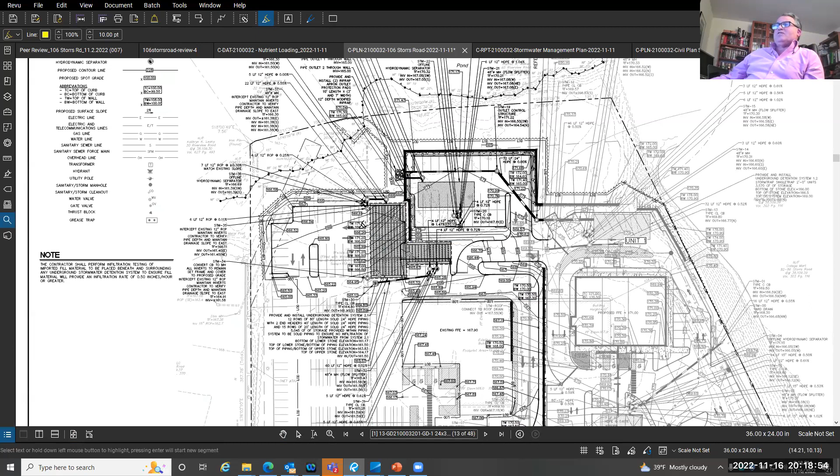So, the initial 1-inch rainfall event will always go to the separator. Once it gets larger than that, you'll get flow going to the separator, but larger flow will go over the weir and then right into their detention system, which is the design of these practices. They definitely modified the construction sequence for the site. The original one was very generic, and we felt we needed a more specific one. I do believe a phasing plan is still needed because you're demoing part of the building.

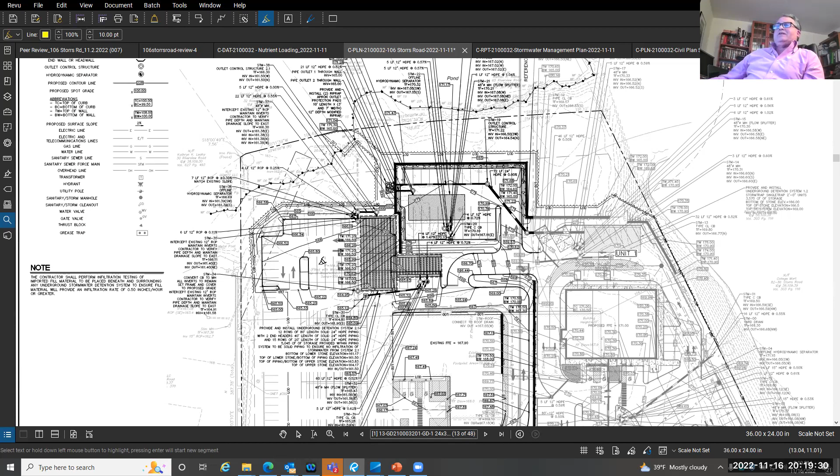Then you really need, since you're going to put the new building where the existing parking is, you need to construct the parking in the back for the car dealership, and then you've got your new construction. And having a phasing plan allows the town to have a document that is reviewable, but also enforceable. And yes, things do modify in the field, but you need to kind of have a plan, so at least you've got something to start with. So I'm fine with having the applicant provide that as a condition of approval.

As I think Matt talked about briefly about the reduction in peak rate for the 2-year storm, the DEP manual from 2004 calls out the channel protection volume, and there's 2 standards in there. There's reduction of the post-development peak rate for the 2-year storm being brought back to 50% of the pre-development peak rate for the 2-year storm. So in this case, the 6.4 CFS, which is the pre-development flow, would be brought back to 3.2.

The other standard, and this is mirrored in the Mansfield regulations, is to throttle that 6.4 back to the peak rate of the 1-year storm, which Matt has done. The pre-development 1-year flow to the east is 5.04 CFS, and he's got 5 CFS going out that way. So it's kind of an either-or standard. He has met it. I do believe this more restrictive standard should be met for the following reason.

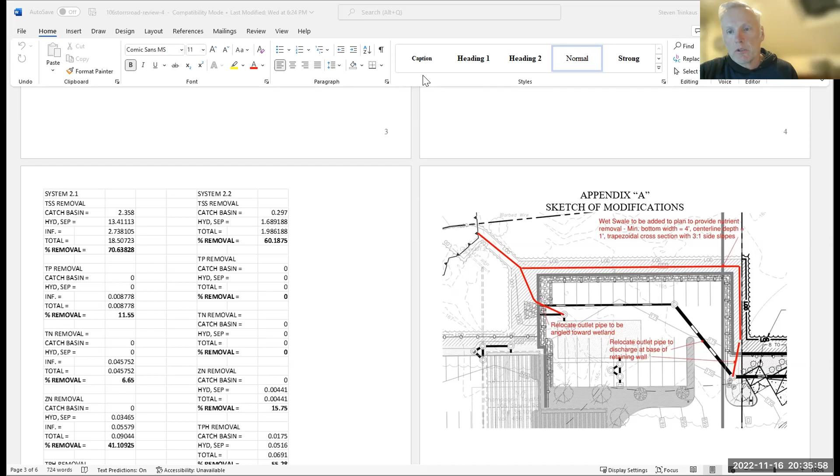So I think if we can improve the water quality by putting in a swale, I think it's a win for the project for sure. I'm not opposed to it. I thought it was a good idea myself.

All right, let me go back and discuss the actual Eric's questions. Yeah, Eric, the loads are relatively small. What I did was calculate them for the water quality storm, 1 inch of rain. And they are small. I mean, they're 0.04 pounds, 0.4 pounds. They're small. A lot of it is coming by atmospheric deposition onto the impervious surface and then gets washed off. But they're not large amounts as far as that goes.

The removal efficiencies that are published in many different places are for standalone systems. So when you have one system, you can use that value. Where they don't hold up is when you put practices in series. As you start cleaning the water, like the first thing here is the catch basins with deep sump. They remove 9% of total suspended solids and about 14% of zinc.

They don't do anything for phosphorus, nitrogen, or actually I should say hydrocarbons are 14%. There's nothing for zinc, nitrogen, or phosphorus. So you take the load for any of those pollutants and you apply the 9% or the 14%. So then you have less of a load seeing the separator.

And there's been research in the LID world at conferences that were before COVID when we had them in person. And I know this year they're going back to in person. But there's a lot of academic research going on as to how much to reduce the published data when you have stuff in series. And the last talk I had heard, I think this was at the 15th LID conference in Nashville, was reducing the second system to 75% of the published value, a third system in series, 35% of the published value, because as the water gets cleaner, it gets harder to remove more of the pollutant load.

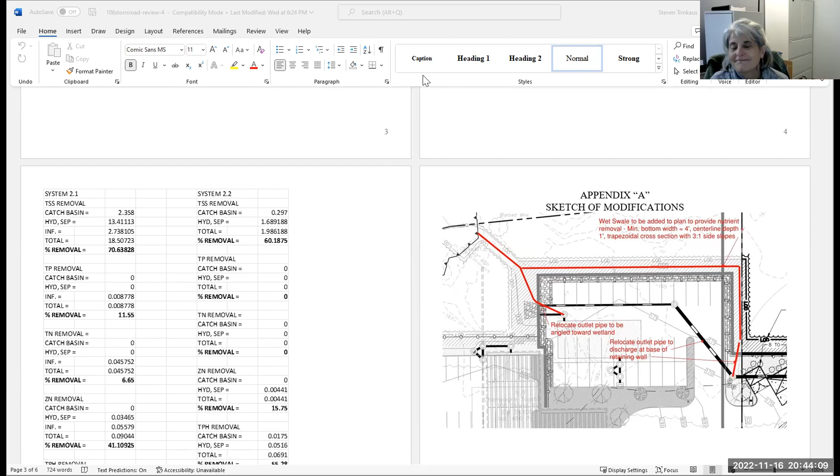That's absolutely true. So I guess there's going to be discretion in your recommendation to the Inland Wetlands Agency, and then ultimately the Inland Wetlands Agency will make the decision. Yeah, they'll make the decision. But Matt, did you have anything you wanted to add? Sorry, I didn't mean to cut you off, Jennifer. No, wait till you finish and then I'll share if I have a minute. Yeah, I'm good. Okay, sorry.

So, Mr. Chairman, as the peer reviewers mentioned, we did have conversations about adding that wet swale as part of a discharge from the infiltration system to the ultimate discharge point in the wetlands. Our only concern is that there was a little bit of a professional disagreement over the removal efficiencies of the infiltration systems that we do have, and then the small amount of nutrients that are expected here.

One of our concerns is just that that wet swale at the base of that retaining wall, 4 foot wide, 3 to 1 up, would be about 10 feet wide. So the practicality of constructing that and potentially having a maintenance road or maintenance access to that wet swale at the base of the retaining wall would actually increase the limit of disturbance beyond what's on the current plan. And our goal is always to pull back from the original plan, which was basically clearing to the property line.

I know it's upland review area, there's a wetland, and there's also obviously residents to that eastern side. So there's also a practicality to the natural buffer there in terms of sight lines and noise mitigation. So our goal was to always pull it back. We think that our system is adequate enough for those nutrient removals to suffice the town regulations and current standards. But if you're recommending us follow peer reviewer with the addition of that, we will obviously follow along.

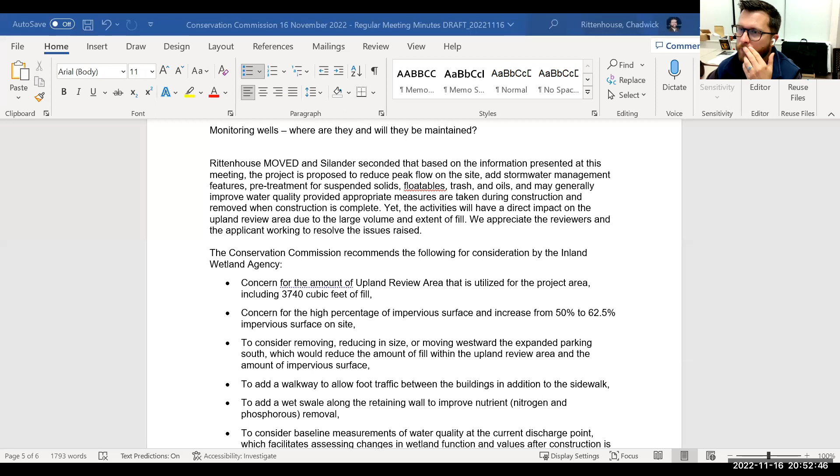I guess I did have one more question. I think you all are looking at my motion, which apparently John will second. Let me remove that. You know the future? Wow.

Mr. Chairman, it's about 38,000 square feet of additional impervious area. Thank you. Okay, so I can get you acreage. Hold on, give me a second. I can convert. Yeah, that's maybe 0.8, something like that. 0.87. Yeah.

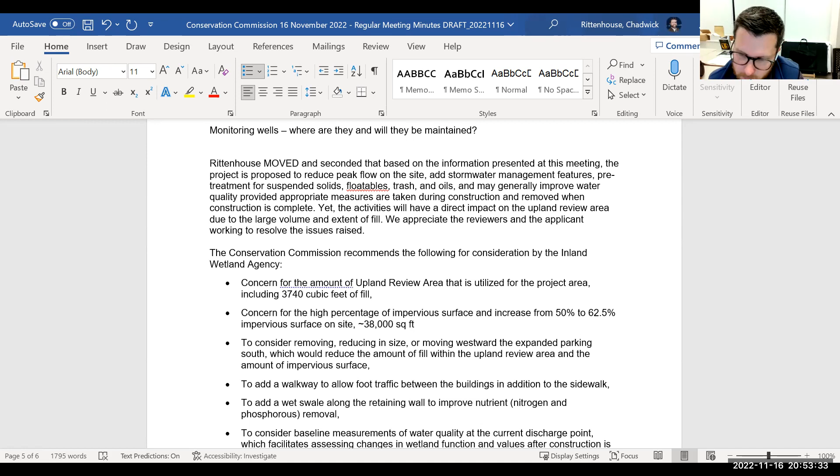I'm happy to second that motion. Let me make sure it's all visible on the screen. And I'm not seeing the future here. That's copy and paste, Chad. Copy and paste. There's a reason I'm able to pull some of this together as quickly as I do. It's because I start from some previous text to help me out.

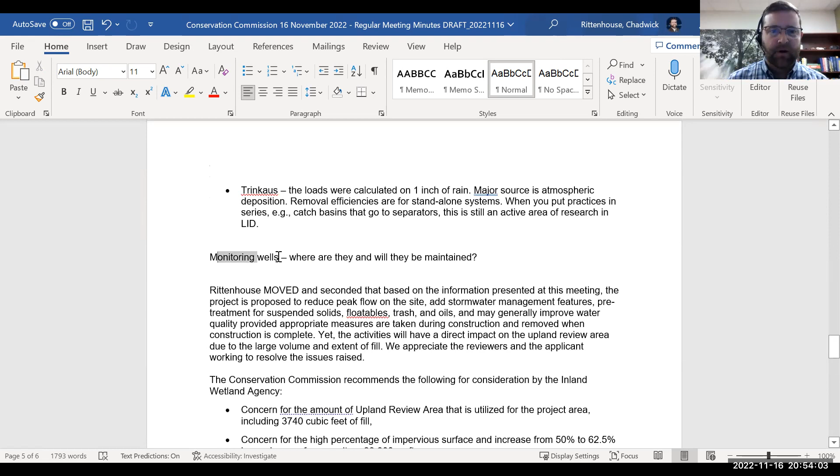So I did have one last open question, which was about the monitoring wells. Those were mentioned, and I did see a few of them while I was out there. I think there's at least 2 on the property. What's the current status of those wells, and what's their proposed status after construction? Will they be maintained or continue to be monitored? A great question, Mr. Rittenhouse.

Yeah, so those monitoring wells were installed as part of the environmental assessment of the property, the phase 1 environmental. Some of those results from that report suggested some areas to clean up. The majority of it is inside the building, obviously related to the car dealership. There are some areas that continue to be monitored and moved to a phase 2 as part of the environmental scientists' recommendation. So I don't know a solid answer at this point, but if they need to be maintained, we will obviously cut them to proposed grade to maintain them. If they can be removed, they will be removed.

Matt, is the redevelopment driven at all by outdated or deteriorating systems in the building that may not be properly dealing with hydrocarbons or things that could leak out of a commercial facility like that? Mr. Chairman, my understanding is it's not the current operation of how things are done functionally within the building, but more of historical uses and prior standards and practices of the car industry. Okay. So just kind of historical cleanup as opposed to an ongoing issue. Gotcha. Thanks.

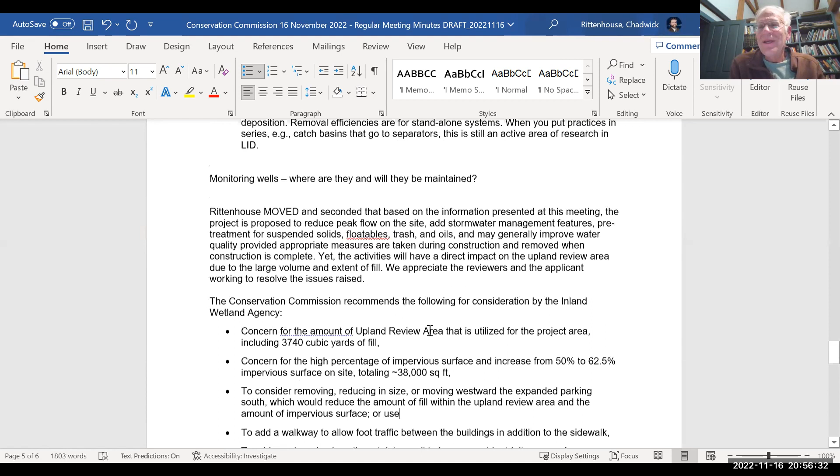I notice that currently about a third of the cars are stored on grass, either in the front or behind. If you look at the aerial photo satellite images, it shows plenty of cars being parked, apparently in storage, not on impervious surfaces. So that calls into question the need of particularly that area at the back of the bump-out parking area, which is clearly just for storage, because you see double lines where 2 cars are parked on top of each other.

So John, the highlighted text is what I captured from that part of the conversation. Does this work as an alternative? Yeah. I believe that's the easternmost lot, not the southernmost? Yes, it's the eastern. It's the back, the rear, which is the eastern edge.

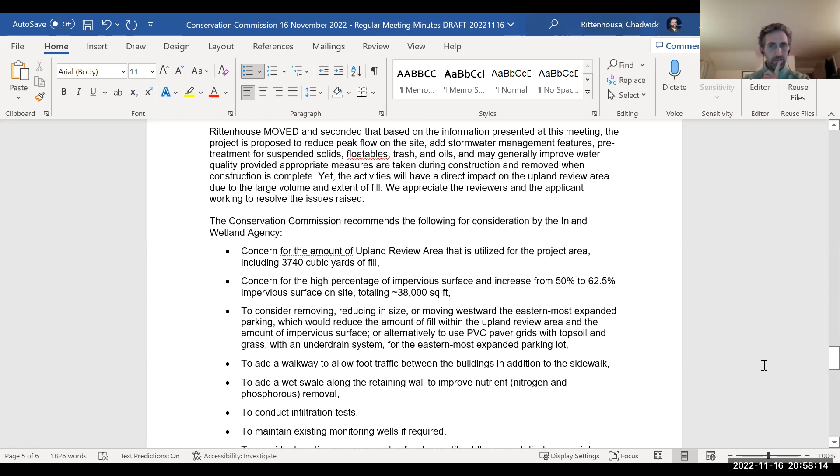I believe one of our peer review gentlemen mentioned something about encouraging actual infiltration tests to be conducted. I don't know if we have that as one of our bullets. Not sure who was speaking to that, but are there specific locations that we need to express here? Mr. Chairman, it would be in the areas of the proposed subsurface infiltration systems. In that easternmost lot? All of them. In all areas? Yeah. The commercial side and the car side. Okay, so Chad, if you could pluralize area to areas, or somehow express that there's more than one spot, thanks.

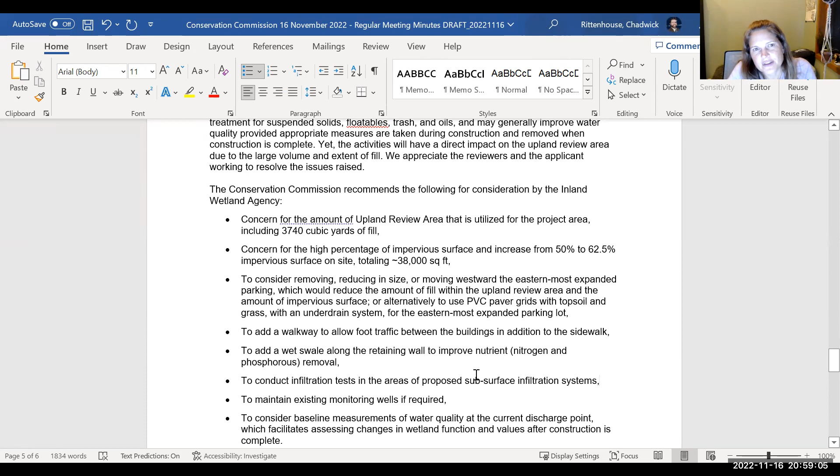This is divergent to the other points listed, but I think John might have said something about having native species used in the landscaping. I didn't know if that was a point we wanted to include. Well, I was going to suggest adding that. Discouraging the use of hybrids and varieties, and encouraging the use of natives. I don't know that we need to get that specific in this bullet, but there are like the Japanese Zelkova, and there's a plane tree. There's better alternatives to those. I think that's good. That's comprehensive.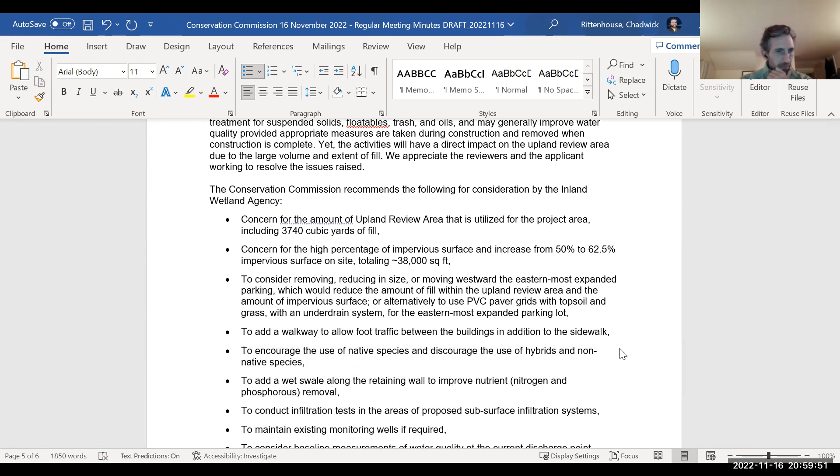Chad, could you bring us down to the lowest bullet? Baseline measurements, you mean sampling and analysis of stormwater samples? You do, okay. Just want to make sure we're on the same page. And then maybe the swale that we discussed at the end there, I don't know what folks think about that, and if we have any input for IWA on the swale that was discussed next to that easternmost parking lot. You know, I think that was a great idea from my perspective anyways. Okay.

So one comment I have is to Matt's point about keeping that buffer. When Steve mentioned that it could be narrower, I think that's a good idea, because you do want to have the treatment of the runoff, the infiltration, but you want to maintain as much of a buffer for the neighboring properties to reduce noise and all of that. That's just one suggestion I have.

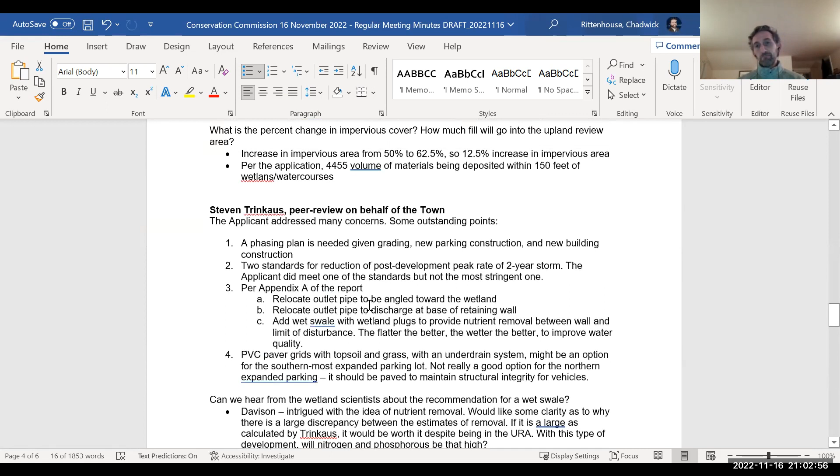Okay. So, Matt, how much is that going to expand the limit of disturbance by adding that and keeping it as narrow as possible? I think, Jennifer, it'll depend on how we size it, and I have a fear that it'll be a little bit of an increase over what we show right now, which is 10 feet. We would try to keep it within that 10 feet, but didn't want to make any promises. I think that was Mr. Trinkaus's point, that the existing footprint was acceptable, and not to push any further outside of the existing LOD. And this could bolster the argument that that parking lot could be moved more westward towards Storrs Road, or slightly modified to create more space for that swale.

Obviously everything on site is integrated, but I think Mr. Trinkaus's original point was that the existing footprint was enough to do the treatment for just that commercial side. That was my understanding as well, although I don't see it captured in the notes that I took during the meeting.

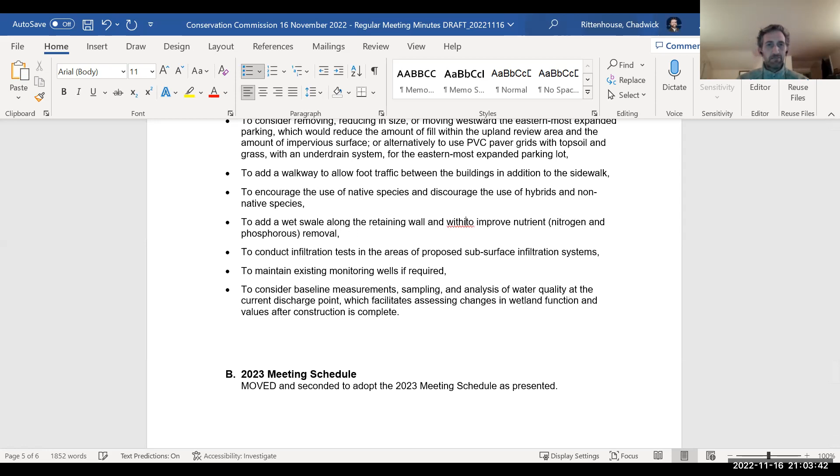Yes, what do you have here? To add a swale along the retaining wall and within? Within the existing footprint of the grassed, landscaped area. Not to suggest that we're asking for an expansion of the limit of work. I think it was referred to as limit of disturbance. Yeah.

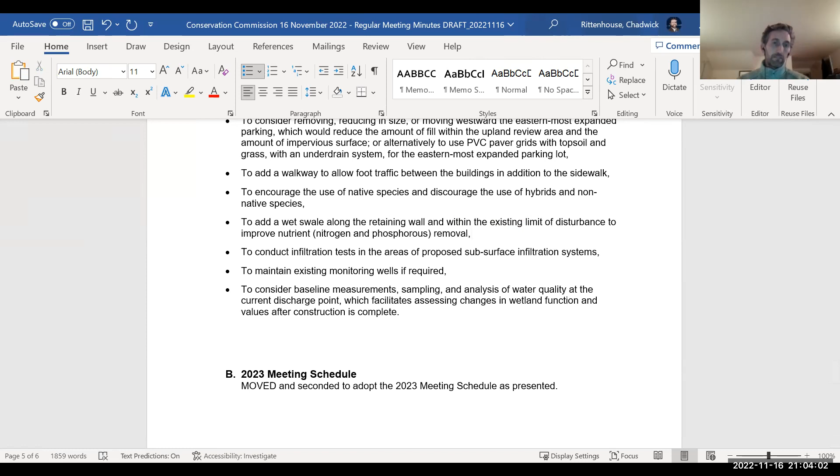Yeah, I think we have to kind of leave it to the developers in terms of judging the functionality of this. If it's a couple of feet wider, I don't want to compromise the functionality of this or the practicality of building this. I think we're all splitting hairs otherwise. So John, are you advocating to take this part out then? You're muted, John. Yeah, I know.

I mean, this is sort of a minor point from my perspective, but ideally, let's say if it fits within the limit of existing disturbance and it's bigger than that area, then again, that goes back to maybe this parking lot could be moved farther westward to create the appropriate space for an important green infrastructure practice on the site.

That's where we get into these situations where we're stuck with being okay with the amount of impervious surface that we have. And I think we should rethink it and think what we really need is a practice that adequately treats stormwater. And if that means we have a smaller parking lot, or we need to push that access connector between the two properties into a slightly different configuration.

The goal should be to have an adequately sized and functioning practice and have the pavement fit, or maybe relocate, again, explore relocating that connection to the front, maybe justifying why that connection can't move to the front. What are the reasonable restrictions that don't allow that connection to be happening at the front of the site?

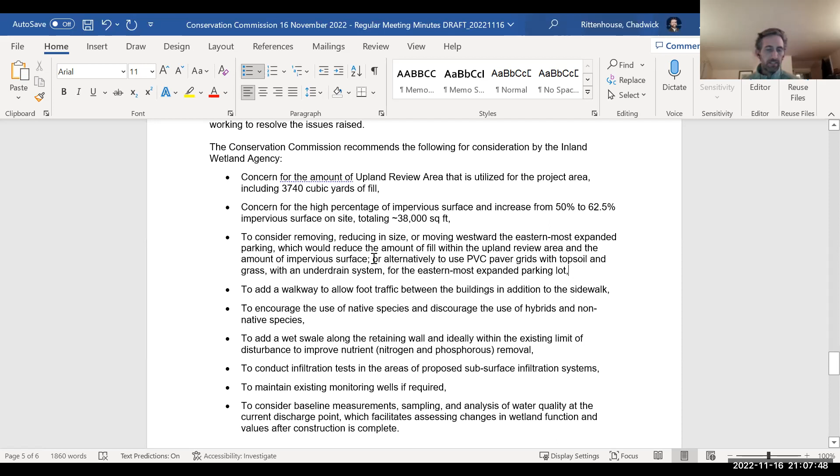I wonder if we consider revising the bullet on this to focus one section of the bullet on moving the parking lot westward, and a second part of that about being very specific about moving it westward in order to move it away from the wetland. Well, I don't know. We're not planners, so maybe that's going too far. Maybe I'm taking that back. No, it's not, because it helps lessen impact to the wetlands in the upland review area.

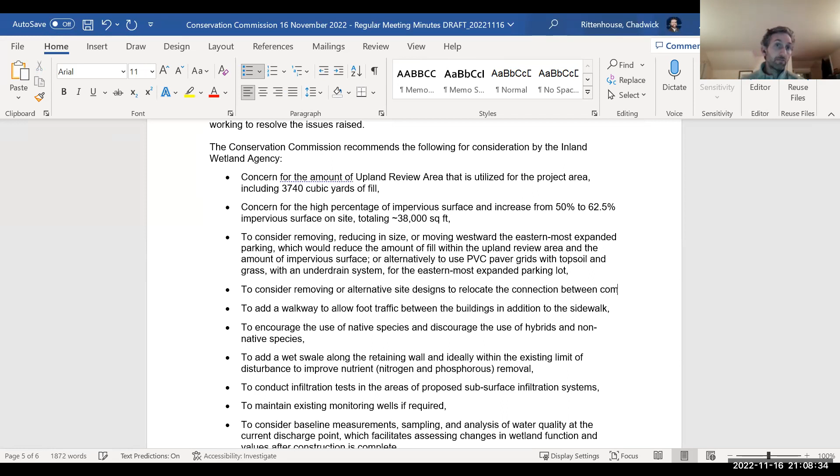Yeah, so I mean, to consider alternative site designs that would relocate that connection between the commercial and industrial uses and allow that parking lot to move westward. And that redesign may also allow for the swale to be more appropriately sited.

Well, to Chad's point before, though, he seems to be suggesting that in the document, he thought there was a reference to the connector not really facilitating commerce between the two, people going between the car dealership and the dentist's office, restaurants, but perhaps to get cars to the back of the building.

Yeah, I mean, this is where we just have to be careful of our scope, which is to protect wetlands and water courses. But that's what this is about, because it's about removing impervious pavement, the less impervious pavement you have. Right. So I think that we can advocate for that, but for myself, it's hard for me to advocate for turning radiuses and things like that I know nothing about. But I think Chad's talking about functionality, and need for impervious surface, which then has more impact.

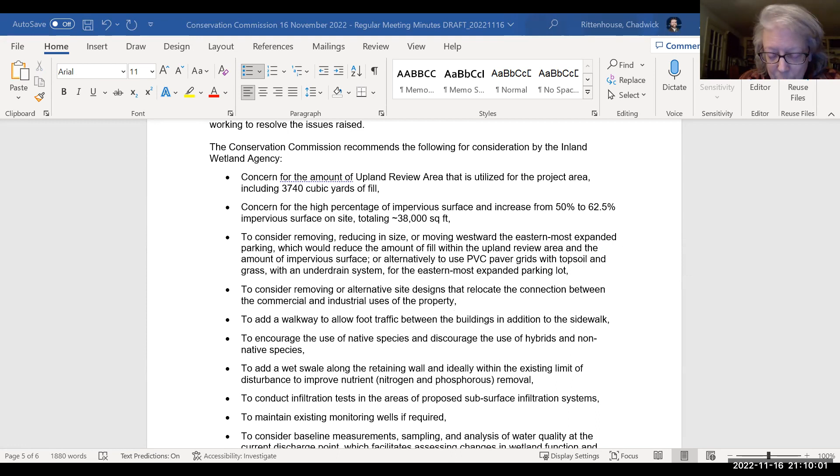Yeah, I mean, I recognize the applicant's choice of we need a connection between these two uses, and they don't need to justify that use. Our comments are like, well, can that connection be better designed in order to move us farther from that wetland area? Exactly. And just maybe that removes some fill out of the upland review area too.

I mean, I recognize the wetland is not great, but we did hear earlier that one of the areas had mottling in the soil at 12 inches. And my sense is that that area is essentially a filled wetland, filled probably decades ago. So 12 inches to mottling is not much. That's practically qualifying as a wetland, or it's a filled wetland probably. So anything that can be done to try to move back, things that are going to help the stormwater infiltration system actually do what it's intended to do and provide more buffer at the same time.

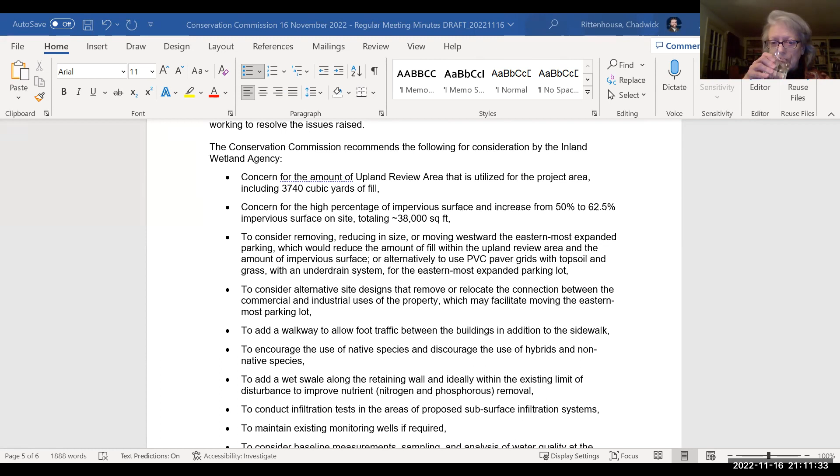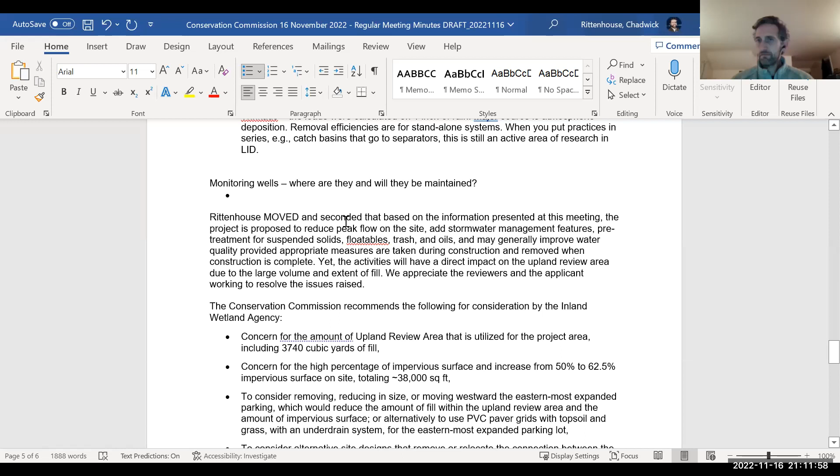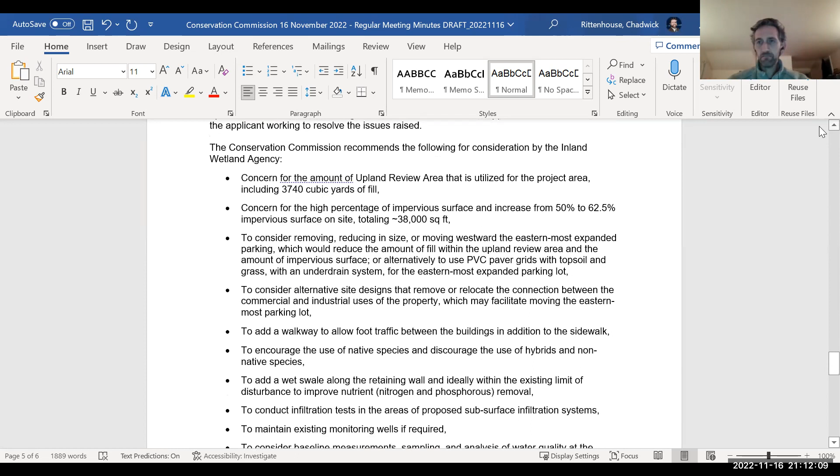Once again, Chad, well done. I don't have any further comments. I really appreciate you chasing the conversation and capturing all this. So does anybody else have anything? No? Would somebody like to second this? I'll second it. Any more comments or discussion about the motion as it's written? Does anybody want to read top to bottom again? You good? Okay.

I am voting in favor. Is anybody voting in opposition? Please speak up. No. Is anybody abstaining? No. So I'm not guessing, I'm saying that this is a unanimous vote. Is that correct? No disagreement there.

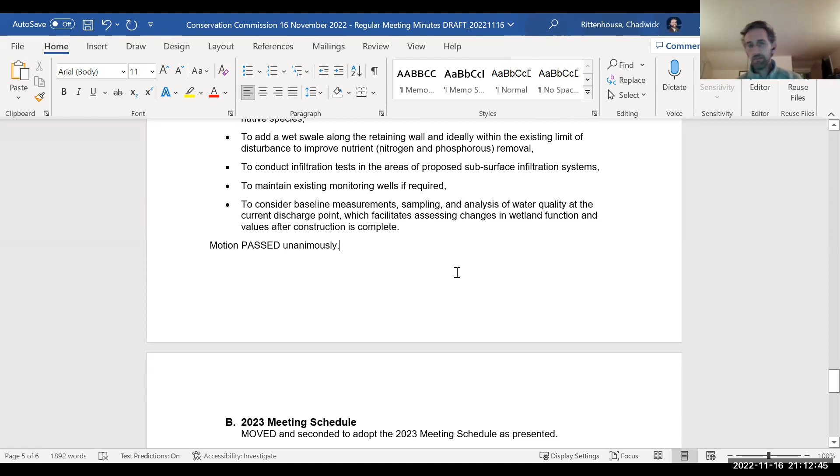All right. Should have just left the text there, huh? Sorry about that. We usually pass things unanimously. Yeah, it's just not good form, especially with applicants present. I know for a fact as a consultant previously that there's a lot of copy paste, and keyword searches are very helpful in removing or replacing client names. Oh, yeah. Sure, we get plans sometimes with other projects on them, because they're moving fast.

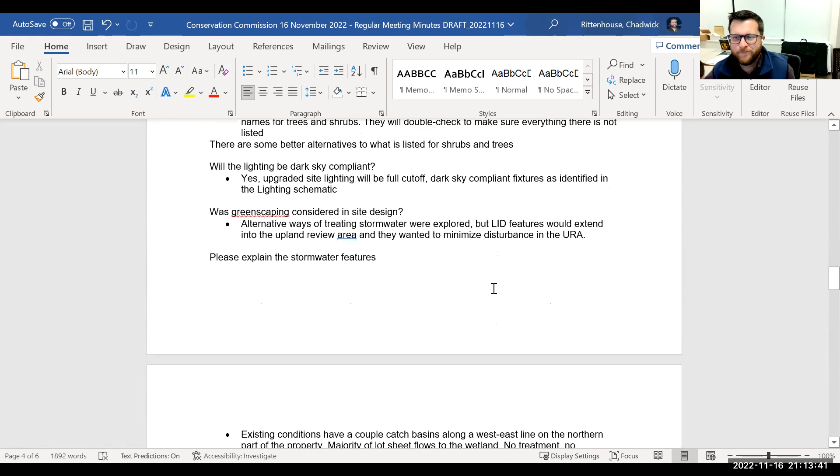Well, so at this point, for our applicants, you're welcome to hang on for the rest of our meeting, but the business for you is concluded. Great. Thank you so much, guys. I really appreciate your time tonight. And thanks, Jennifer, for getting us to this point. Have a great night, everybody. You too. Thank you, Matt. Thanks for all the information and your time. No problem. Good night. All right, I'm gonna stop sharing my screen so I can finish cleaning up notes. Okay.

Jen, I know it's not always easy to do, but having our peer review folks here was nice. I know it ended up being kind of a long discussion, but that is really helpful to have them here. Well, the reason why I especially wanted them for this discussion is there were these points of discretion, right, that I felt they needed to talk about. Generally I try to have things wrapped up before they get to you or the Inland Wetland Agency. But in this case, there were just a few little items that needed to be discussed. Yeah, they're pretty minor.

But no, I feel like the town has been great about finding, I really enjoyed what Land Tech's been able to do for us. And then Mr. Trinkus and Mr. McManus as well. So that was great. Let me find the agenda here and just get us to our next item.

Our meeting schedule, which is item 5B. Does anybody have any concerns? Is that your meeting schedule? Did that come up? Oh, here we go. I'm sorry. So for January, we have a lot of applications, where the Wetlands has a number of receipts on the 21st. So I have put your meeting on January 11th as opposed to the third Wednesday, because the public hearing for a few of them is supposed to open on January 17th. Okay, yeah.